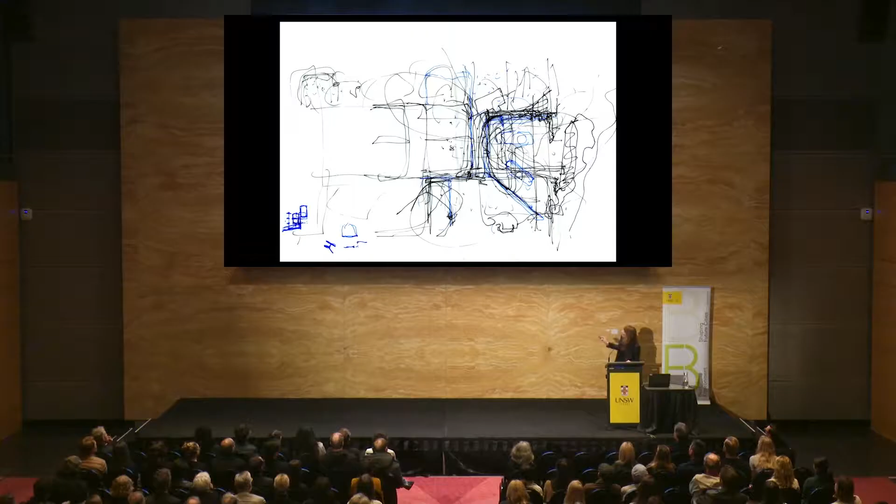The site has a beautiful rock on the street. It has bush to one side, and it stretches out to water. These are the aspects of the Griffin site, I guess, the Griffin past. And this drawing that Nick and I did, our hands one laid over the other, responds to Griffin's site with a room to the rock, a room to the bush, and a room to the view.

That really set up this pinwheel plan. You can see it's almost a direct translation from that sketch. You enter directly into around the rock, directly into the kitchen. This is the living room, and this is the cosy lounge.

What's important here is the material of Castle Crag, defined by rock, and Griffin's work with rock and concrete really become the material of the house. So in the kitchen it's almost like a cave where the rock comes into the house, as opposed to the living room, which is about precipice and looking out to the water.

The cosy lounge has a fireplace, here. We all know that if you get more than about 1.5 meters away from a traditional fireplace, you won't feel any warmth - that's why the lounge is so small. But this is one of the elements that we retained in situ. Here was the house as it was - we actually retained the fireplace in that wall.

We left the story of the marks that we had made on that house in the architecture. We mixed recycled brick from the house with new recycled brick that we sourced elsewhere as the materials of the project, the past being evident in the material of the house.

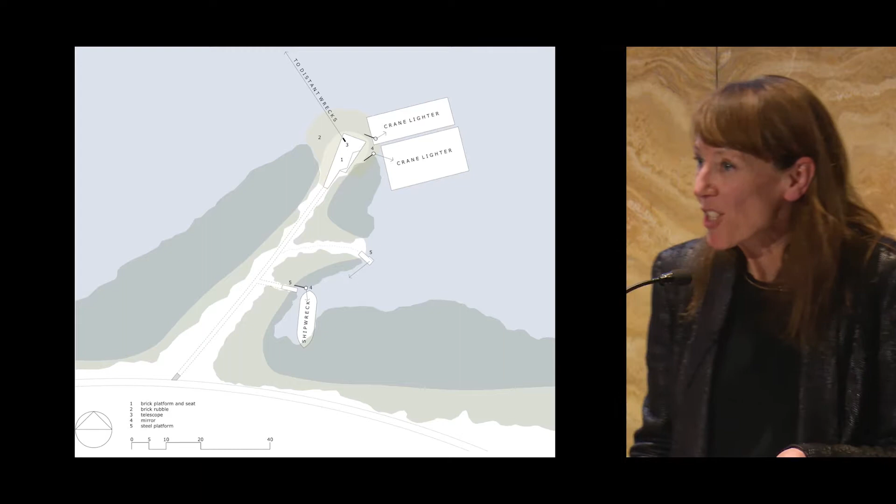Our brief was to provide a safe lookout that was accessible to all, that kept the public off the delicate saltbush, that protected mangroves, protected the headland, the little peninsula point, from the encroachment of mangroves, because that point is protected under treaties between China, Japan and Australia for migrating birds, and they won't roost there if the mangroves encroach. So there was a whole lot of interesting conflicts.

We were drawn to this project by Lucy Lippard's book, and through this project we really looked at the history of lookouts, which evolved in the Romantic period. Lookouts basically entice the visitor to look at a view that has been chosen for you.

We took this a step further by designing what we called looking devices, so that people would come to look at these shipwrecks or whatever, but they'd actually look at a reflection of it through a telescope or a mirror.

The mirror was also a way of enabling people to look into the adjacent crane lighters if they were in a wheelchair. That was our way around avoiding a 30-metre long ramp.

This is sort of the idea of those things. We use little metal platforms and material coming out of the past, the ships, to get up close to them. We made as narrow a pathway as we could to give the sense of discovering a shipwreck. So these look like they've almost fallen off a boat.

The little peninsula was man-made. It was created to cart bricks from the nearby brick pit, load them onto barges, and this is a pile of bricks we found when we first came to the site.

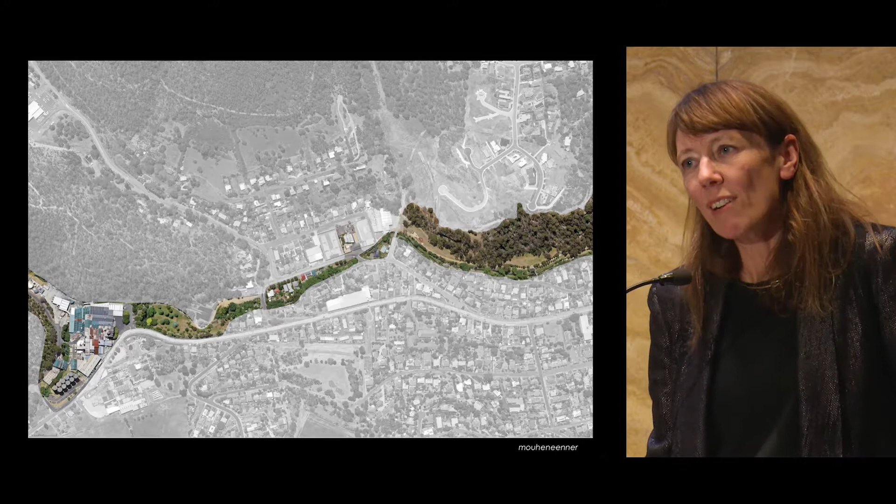Our approach to this quite harrowing history was one of inversion. This diagram shows it quite beautifully: this valley would become a public walk, and this space would actually be a public space, and then the museum, if you like, would be these 2 yards either side. So where there were compounds, there's open space. Where there was austerity, there would be sensual richness. Where there was division, there'd be joining together, and where there was controlled movement, there would be freedom of movement.

So here's that public space. You come in, this is the visitor centre at the rear, and the elements of the walkway, like the cloister, the female cloister, mark the height of the walls as they once were.

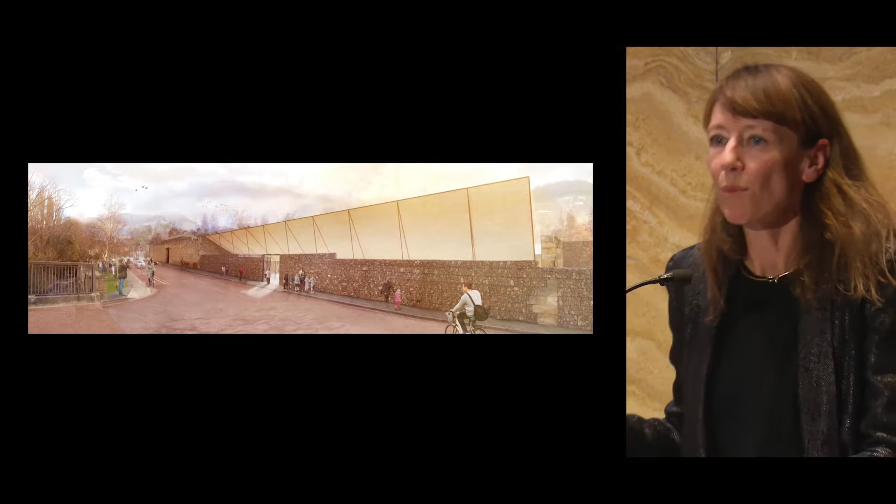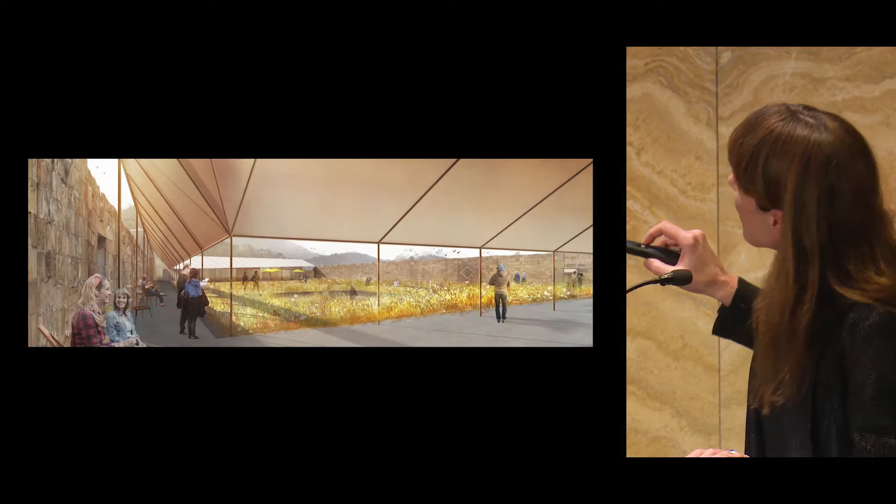These women would pick the tar off the ropes from the boats. They would also do all the laundry from the hospitals, and they'd make uniforms for soldiers. So cloth was what they did on a daily basis — work was to do with cloth, and they wore a yellow C on their uniforms for criminal class.

So we worked with Sue Barnsley and her team to evolve this luxuriant garden of yellow meadow and yellow flowers, and the building was essentially made of cloth, with rooms defined by cloth, tapping into the seasonal grassland calendar.

Settings is my second theme. We prefer to think of settings rather than sites because it implies breadth. So we think of geology and topography and that relationship then to hydrology and landscape and urban context and microclimate.

Philip Thalis introduced me to Norman Selfe, who wrote about Sydney in 1906.

The outline of the present city bears a rough resemblance to the back of a right hand severed at the wrist, Cleveland Street, its southern boundary, being the line of severance. Laying the palm on the table, the thumb represents Pyrmont, the long space, Darling Harbour, the forefinger, the York Street Ridge, ending with Millers Point and Dawes Point, the middle finger, the Macquarie Street Ridge, ending at Fort Macquarie, now Sydney Opera House, the third finger, the Domain, ending at Mrs Macquarie's chair, and the fourth finger, the Darlinghurst Ridge, ending at Potts Point, with Rushcutters Bay as the eastern boundary.

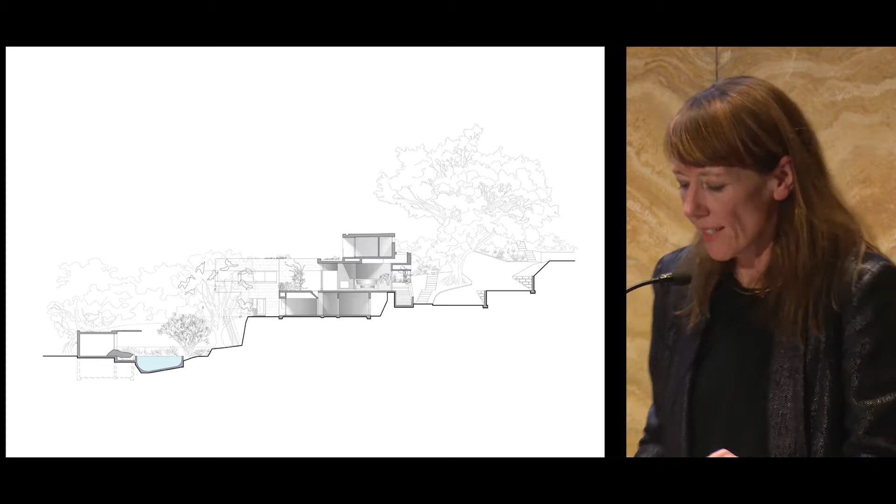This is the little cliff that runs through the site itself. So that cliff organises the site into an upper part and a lower part. And the upper part is here, that's where the main house is, it sort of hugs the corner of the site. And in the lower part, like in a sort of natural setting, the lower part holds a water hole, a pool.

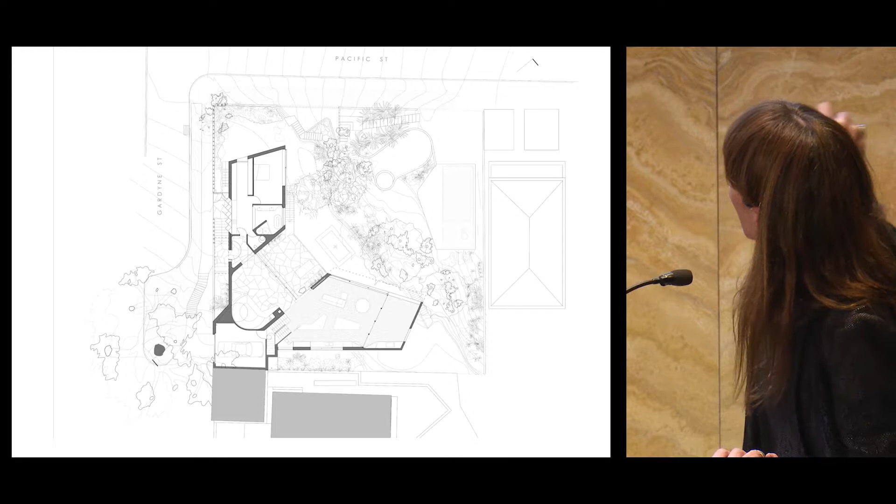So the square site, the house tucked into the corner, and this is the most important room of the house, really. It looks diagonally across the garden to the distant ocean because the diagonal is the greatest extent of view. This is the biggest house we've ever had a brief for, and our response to the brief for a big house was to give them a big garden. So it's a strategy for a big garden.

So that's looking from inside that space, where again we've used sandstone, and it's thick stone. It's not a thin laminate, it's a thick stone on the floor to bring the sense of the garden right into the house, and literally the garden into the house through planters.

And then the house itself extends out into the landscape, so it's cantilevered at either ends, and all the pathways in the house become pathways in the landscape. They sort of become blended, if you like, with the contours of the garden. Framing views and using the house also to edit views of neighbours.

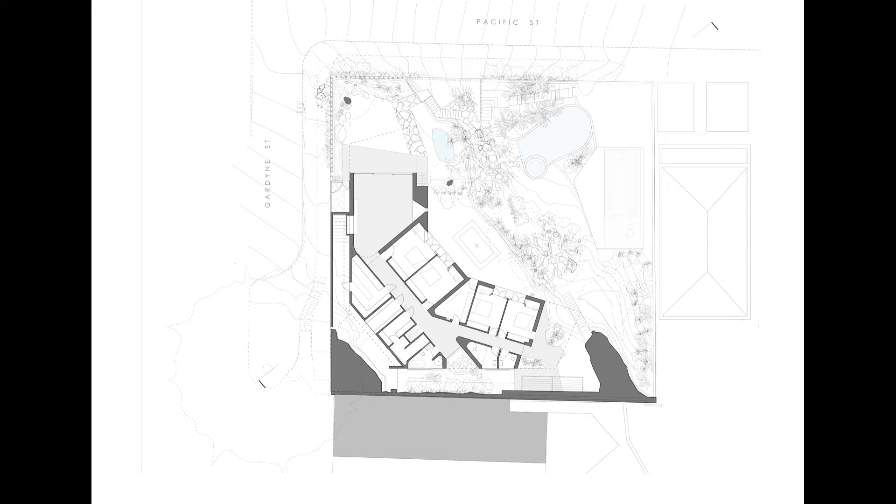As you move up through the house, the materials get darker, and as you move down, the materials get lighter. And then at the lower level, where we've got lots of bedrooms - there's 4 boys in this house - you can see how the corridors, hallways always end in garden. And then they become pathways that take you through the garden, down the stairs to this lower part of the garden, up the stairs. There's circuits that run through the house and garden together.

That's looking at that lower corridor out to that rear garden, the side garden. That's on the south side of a 2-storey building. It's kind of remarkably verdant.

And the cantilever out on the northern edge. So we retained lots of trees, and then we imported lots more trees into the site, and we retained existing cliff and boulders and relocated cliff and boulders. And this is then looking down into that lower garden, which holds the pool like a waterhole, and this cabana space really gives life to this pool. You can see the floor material continues in, and even the landscape continues in. So it's a real sort of melding of the landscape setting and the house.

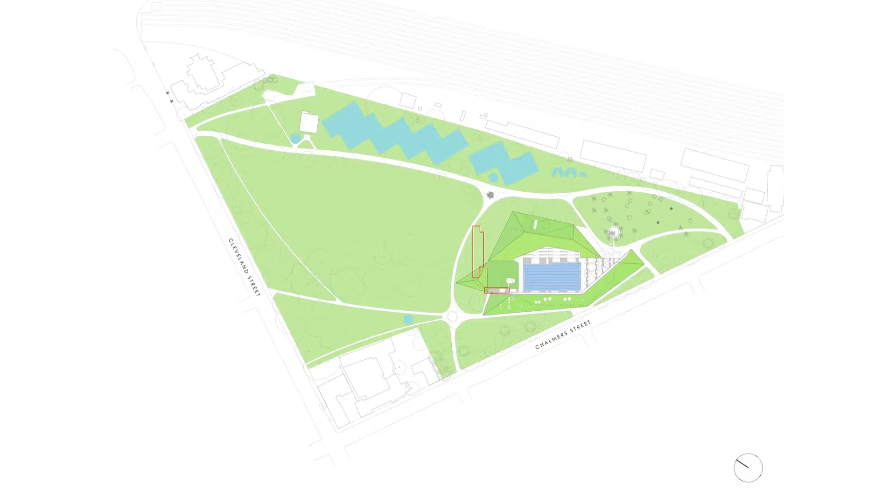Another very important thing was that we packed activities along the edge of the railway line, along this shareway, to give it a sort of vibrancy, including fitness nodes around the park. So we really tried to bring activity to the park, recalling the activity of the past. We worked with Sue Barnsley on this project, I should add.

So you can see here the folded landscape over the building and the scale of the park. The architecture responds to the scale of the setting, but also responds to the intimacy of the act of swimming and changing and swimming.

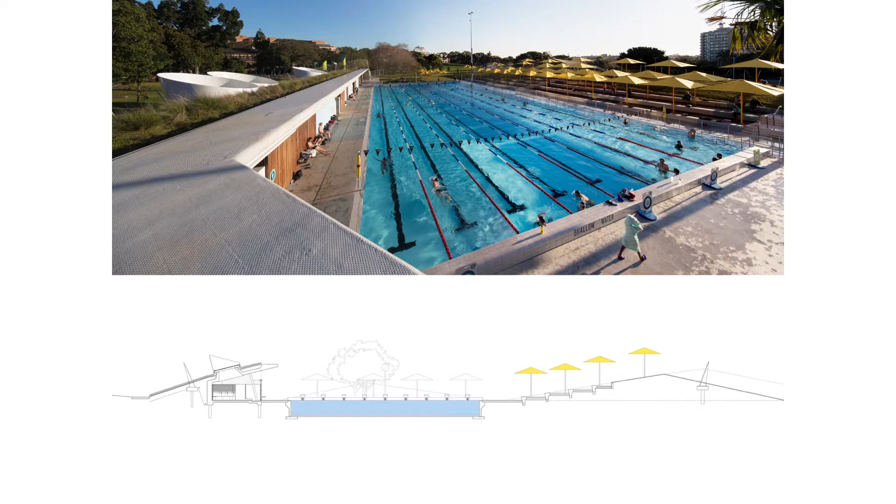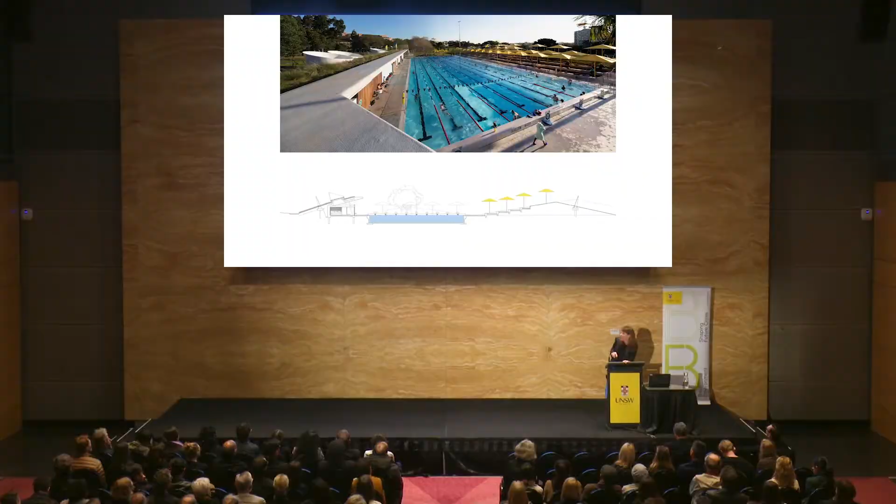We used mounds to contain the contaminated spoil. The presence not only of the pool but also the ice skating rink, which is an external rink, left a lot of toxicity in the soil. So we used the mounds as a way of dealing with that on site, and also as a way of separating, connecting park and pool, and dealing also with the microclimate, so just taking the edge off some of the winds in the park, so you could sit out of the wind.

And it forms this kind of beautiful space and this beautiful acoustic space. So when you stand up here, you can hear the splashing of lap swimmers. You can't actually hear the buses on Cleveland Street and Chalmers Street.

It's a long line in the landscape when it folds down at either end. And the material of the tile reflects the water in the pool.

At the same time as being a building that's essentially underground, we worked very hard to deny this. So I think this photograph shows it quite well. We worked very hard to make this feel like it was sort of floating.

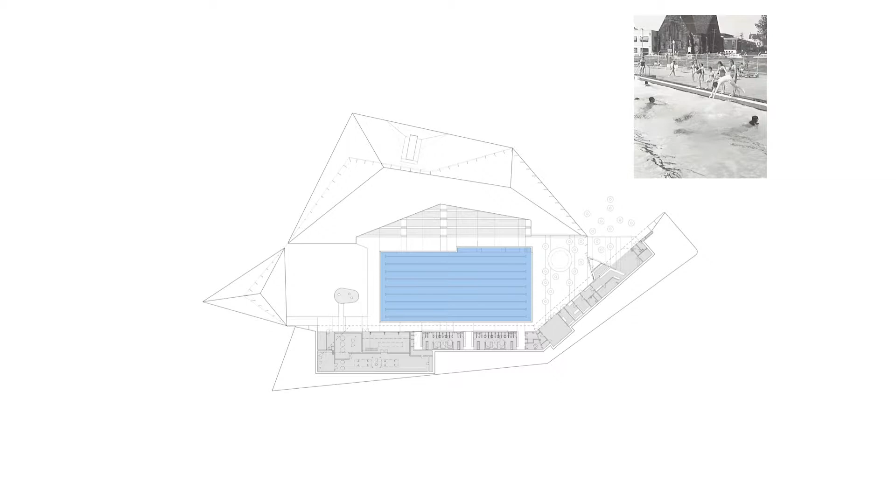And these are the change rooms here. This is essentially the services plant room, which includes capacity for future trigen, and the cafe, and then administration up the end near the toddler splash deck.

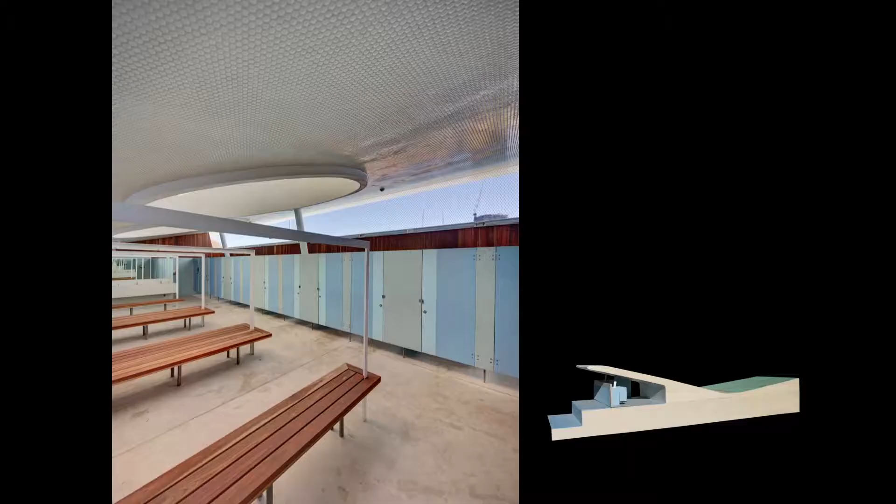So the big light funnels were a way of dealing with the fact that you're underground. Also bringing a balance of light, so pulling in light from the east, and also providing privacy to the apartments behind. So dealing with the setting in a very direct way.

The section is very intimate. Here it's only 2 metres - we had to get a dispensation from our certifier for only being 2 metres. You can really see the tiles come around like this, and you can sort of touch the material of the tile on the back wall. And then the skylights are oversized, so there's this play between monumental and intimate in this project.

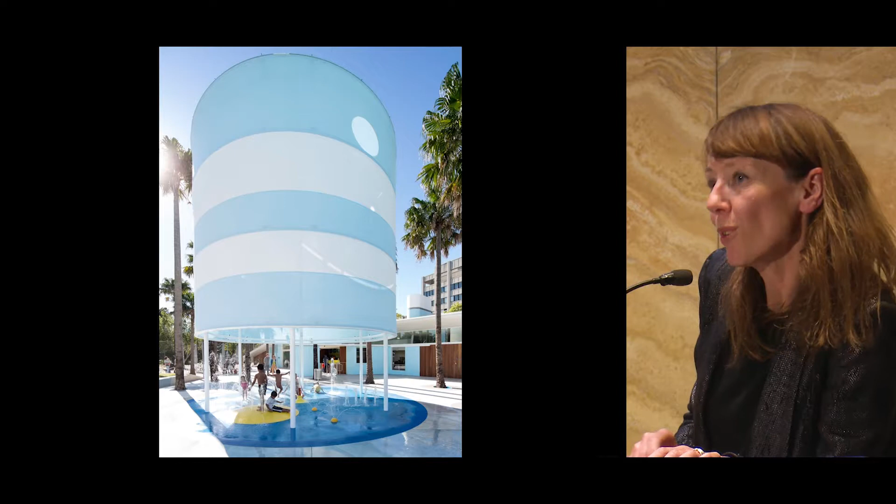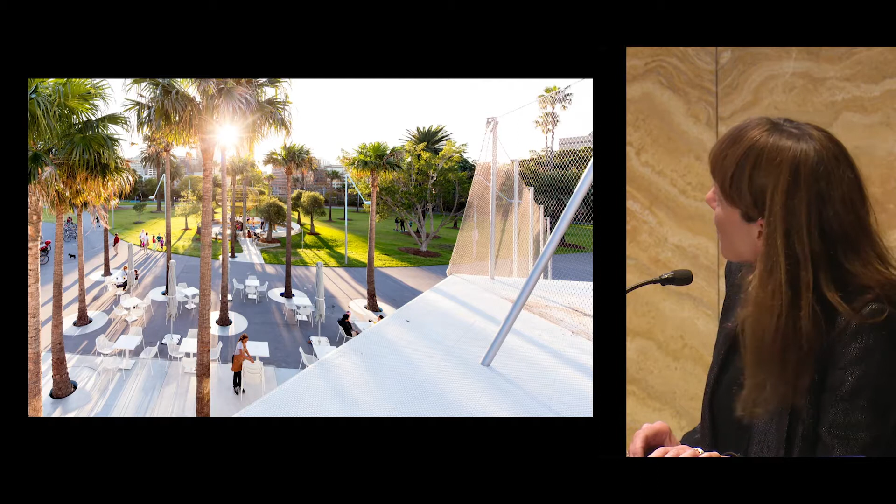The other elements needed in the park that were not to do with topography were treated as follies, I guess a bit like the Victorian folly in the park. You can see here the co-location of the little toddler playground with the cafe, and we used a grove of palm trees to bring shade to this area.

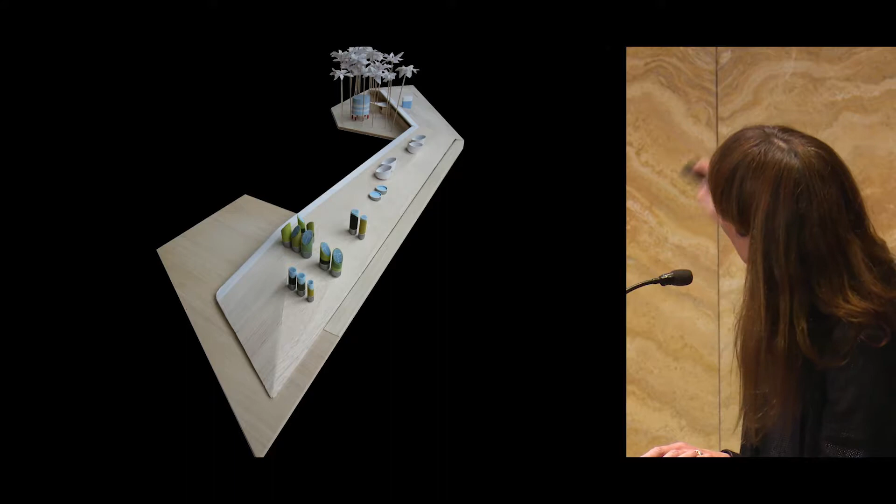Okay, the roof was quite a tricky component. So here we have the palm trees and the toddler splash deck at one end, and down this end, underneath here, is the plant room and the trigen. Pools are incredibly corrosive environments, as you know, even external pools, so there's a lot of fluing to do with the services and skylights.

So we collaborated with Sonde van der Haar on these chimneys. They're an artwork, called Shades of Green, because although you're burning gas to create your electricity, it's still non-renewable.

But the most important material of the project is, of course, the meadow. And Sue Barnsley did an incredible job selecting a variety of different native species that would flower throughout the year.

Connected to the idea of a pool in a park, of course, is how to fence it. This beautiful running fence project by Christo inspired an approach to the fence, where if we had a mesh fence that could duck and dive over our roof and in and around the meadow mounds, you would never see it in its entirety. So you'd never feel like you're being kept out of something or enclosed within something - you'd only ever see part of a fence. And sometimes the fence is quite invisible, and other times it's more visible.

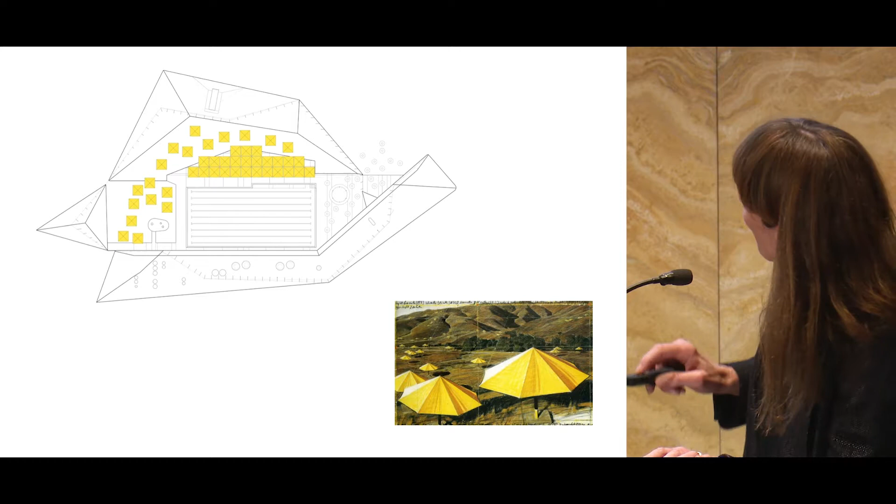And the other component to do with setting is the shade. If you want to have school carnivals at a pool, you need complete shade over your bleachers. So we introduced the idea of umbrellas. The thought here was that some people will put up the umbrellas and other people will leave it down, trying to cater to the sunbathers as well as the people who live under a hat like I do. But it really creates a dynamism within the park. Whenever you walk past or drive past, you might see all the umbrellas up or only a few up, so it gives it a real sort of living vibrancy through the material of the architecture.

And that's that major park pathway, as we finished it.

We embrace limits as a creative opportunity. And I love this project, this little pavilion by Decoupled Architects, because it seems almost that architecture is limitless in this project. So limits might be a boundary, they might be a set of regulations, they might be an actual physical condition, but they're productive to our design process and often generative of our design solutions.

This is a house at Whale Beach that Nick and I designed some years back, and you can see from this little topographic diagram that it is very steep. It has beautiful views to Careel Head, but it has a huge escarpment right behind it, so it's really challenged for sun. So steepness was the first limit, and this was a little exploration in how do you make 60-odd stairs feel manageable to your front door. So this was really exploring architectural promenade and connecting that to how we would manage landscape.

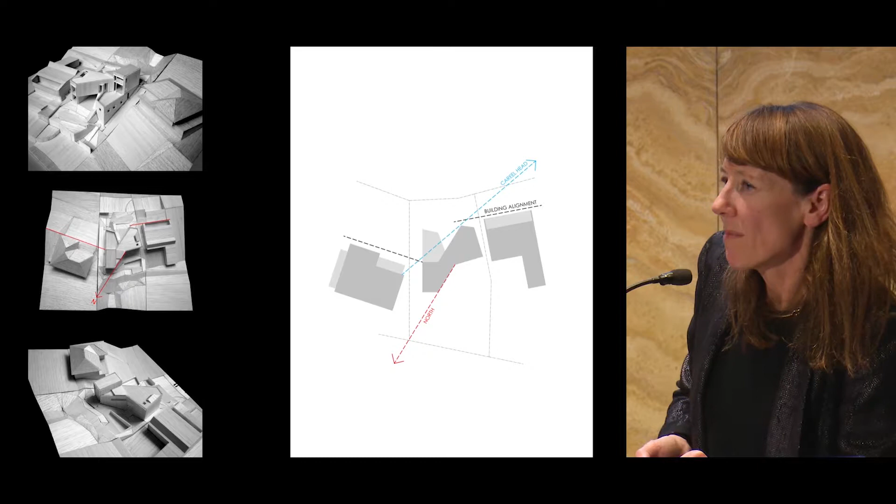And then secondly, the planning regulations were quite challenging. So the setbacks, trying to catch any piece of north sun that we possibly could, and also maintaining our neighbours' views. So I think it's a project that might look from the outside like it's sort of a sculpted thing, but actually it's all sort of almost mapped.

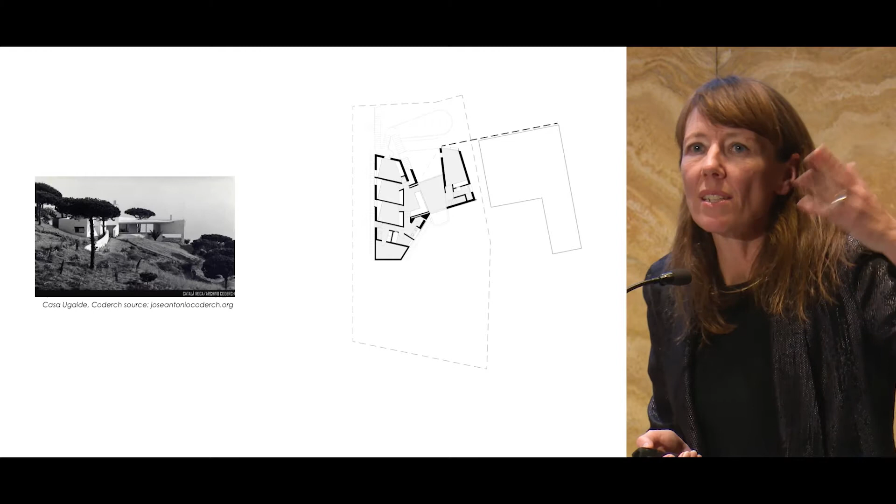So each level is completely different to the level above, depending on the planning regulations at that level. This is the ground floor. It was a 300 square metre house brief on a steep site, which can be quite imposing, so we were looking for devices to dematerialise the mass of the house, trying to make it feel like it doesn't overwhelm its site.

This is a Coderch house, Casa Ugalde, just north of Barcelona, and there's an opening through the house here. This is the opening cut through the middle of our house. It takes little cues from this project.

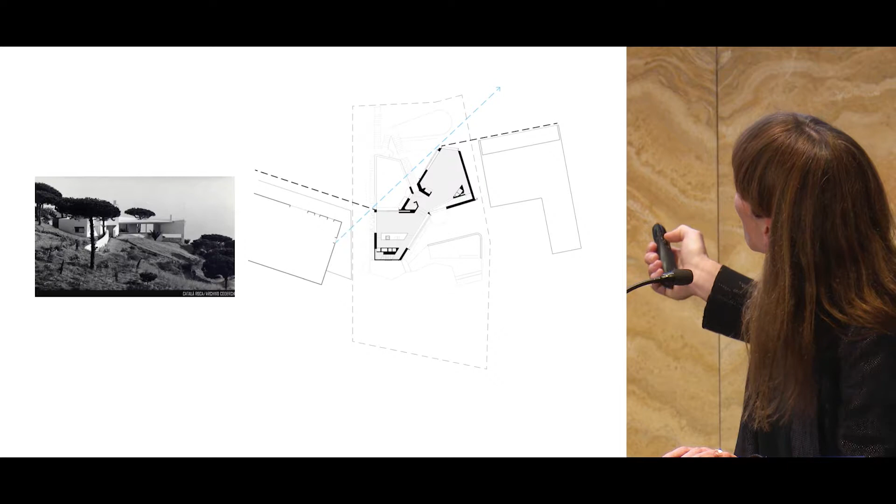When you come up those stairs, you come into an incredibly thin part of the plan. On one side is the living room, and this is the dining room. The architectural promenade, in a sense, continues into the house through stepped levels, which also help with views.

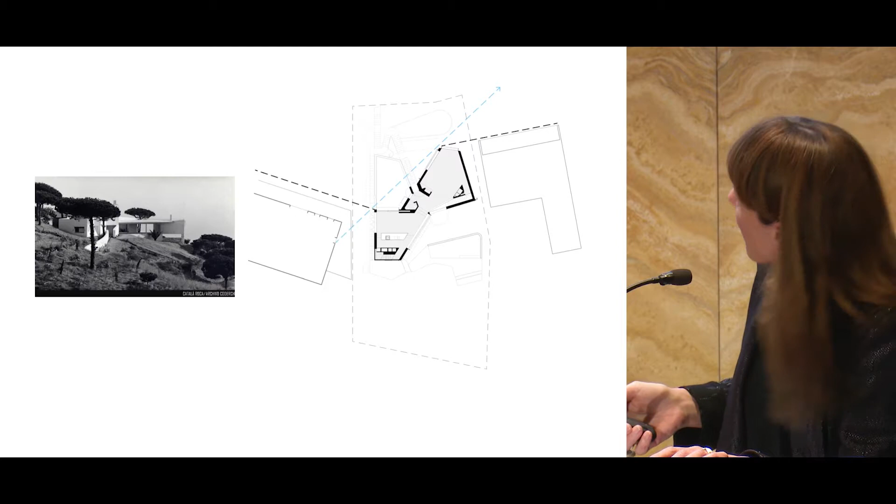And then the top floor, trying to deal with that two-storey height limit. So the third storey actually isn't a third storey, it's really a second storey, but it's incredibly constrained in this little corner of the site.

So that leads to this sort of winding sense through the house. This is the main level, as you wind, almost as if you're walking along a contour on that steep precipice.

It speaks to the proximate view, the view you can open the back door and step into, which is also very beautiful. Then set against that is the horizon and the headland, the majestic view. So it works with proximity and distance, and it's shaped by its kind of planning limits.

We also use different materials to help dematerialise the mass of the house. The upper level is clad in timber, and being a bushfire 3 zone, as it was called at the time, this is spotted gum, a fire-resistant timber, which we also used to derive the interior architecture. So this is the upper floor, all timber, like a little timber room with timber fire shutters, and it's very tiny and intimate, almost like being on a boat.

This is, we're back in Bronte, I think you might have seen that image before. This is actually the house that Stephen and I made for ourselves. It's just across the road from the park that leads down to the beach.

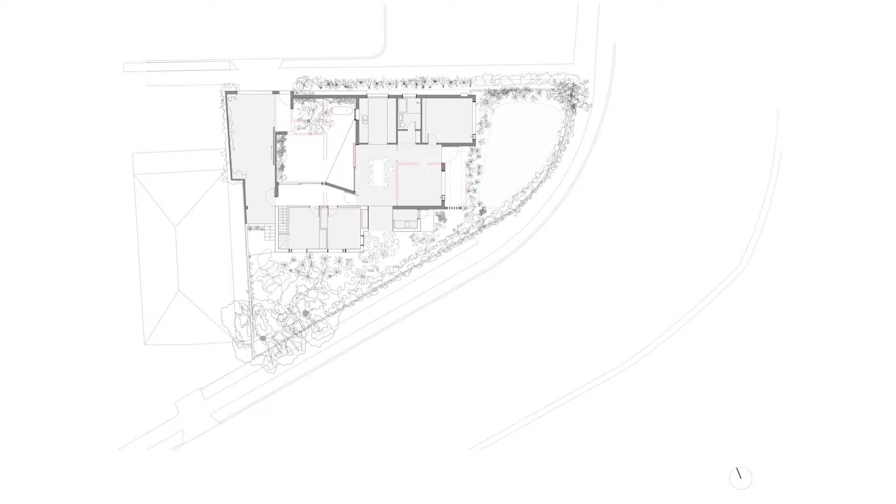I literally cut a hole in the house, and luckily the road's a little lower, so with a bit of planting you can mostly not see the traffic, and that somehow helps you not hear the traffic if you can't see it. And literally a hole in the house, a hole in the roof, sorry, and we craned in a tree.

So this is then looking east towards the garden and the ocean horizon, and then looking north towards the street. We stepped this level up so that you can retain a window and have some communication with the street, because the floor level is basically the same as the footpath. That all works fine until someone unexpectedly very tall walks past and you get a bit of a shock.

And then this is the view back to the courtyard west, and down this is the old wall of the house, and these are the bedrooms. And then through this black reflective portal to the south, which is full of green and garden, it reflects at night.

Limits in a public building. This is a surf club, about 500 kilometres north of Sydney, at Crescent Head, just on the coast from Kempsey. A beautiful little fishing and surfing spot, an iconic surfing spot, as you can see from this postcard. Longboard point break, I'm told.

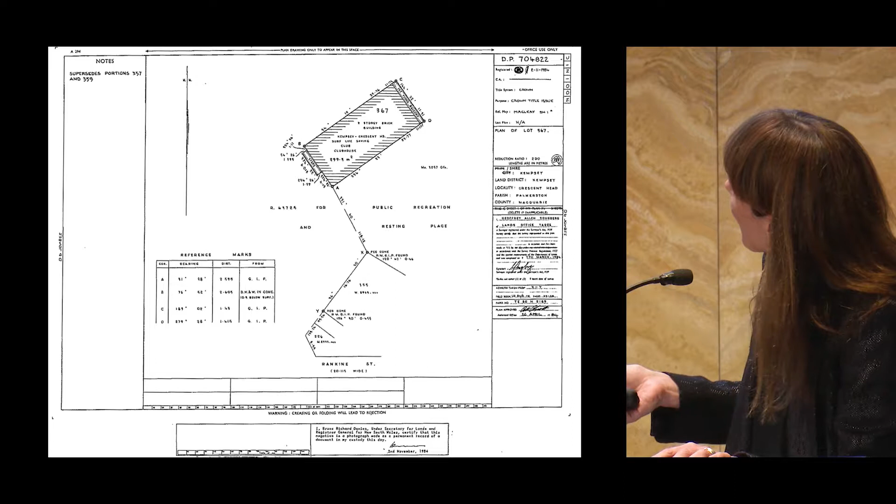This was the most important drawing—the legal document that defines the site. The club has a lease in perpetuity with Crown Lands for $200 a year. Basically our brief was, if you so much as hang a gutter over that boundary, we lose our lease. So the challenge was to somehow relate this given plot to this magnificent site.

Luckily, if we built the full 2 stories, we'd be over the 500 square metre limit, which then triggered the need for a fire booster pump, which was about $250,000. So we used that limit in order to deal with the other limit—by carving space out, that meant we could feel like we were addressing the site.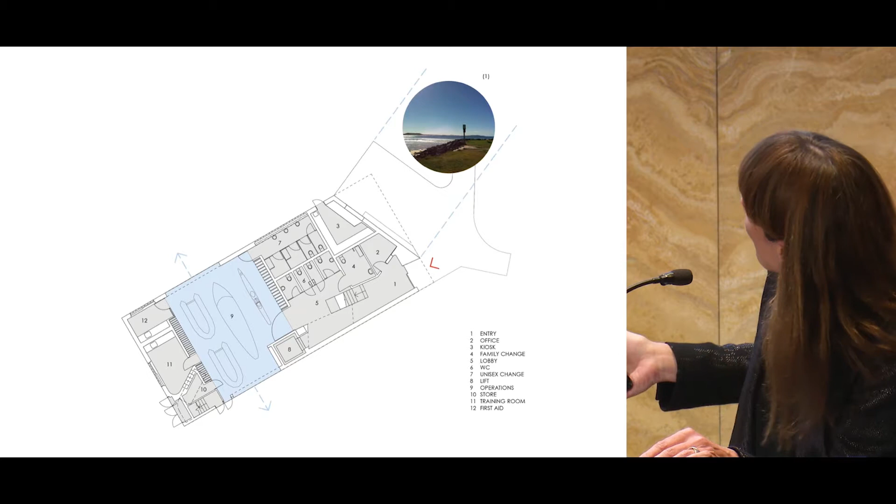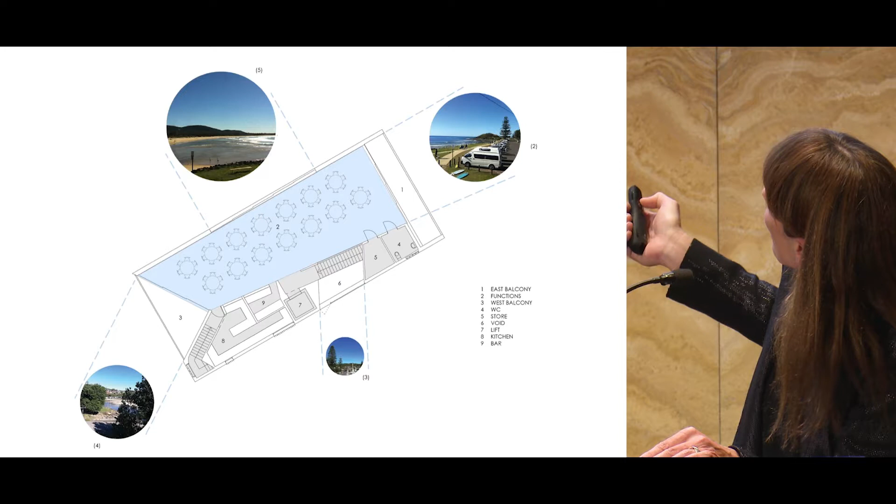So the kiosk, the lower level, faces Hat Head. The function room up the top, the entry, looks back to the town. That one end looks to the horizon, the other one along the beach, and then the little balcony faces you back to the creek. That's the kind of sense of it.

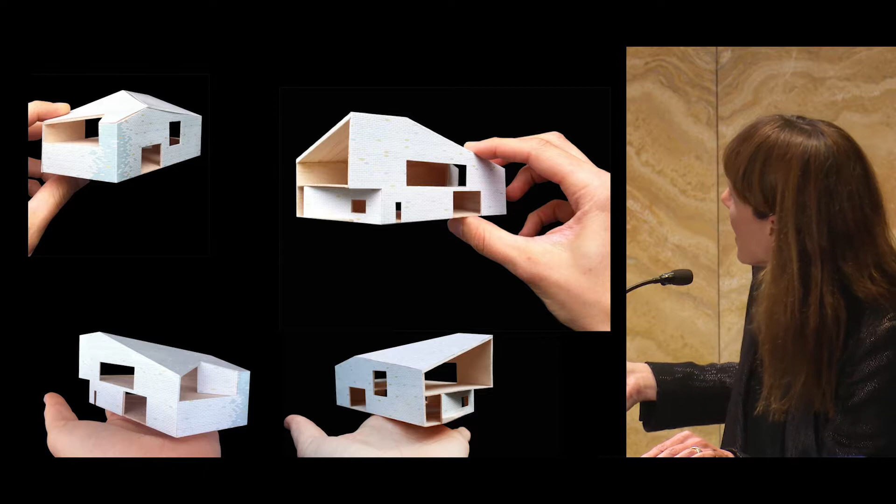It was important—this is a comment Stephen made—that this building somehow feels like it belongs there. It had to have a sort of beachy quality, whatever that meant. The way we interpreted that was that it needed to feel like a building wrapped in and around, so we were looking for a material we could clad not only the walls but also the roof with.

It's also not a particularly wealthy demographic, and we were lucky to get federal funding of $2.4 million, supplemented by sausage sizzles—so not a lot extra.

You might see at the kiosk end, that's actually the boundary. And if you look at that seat, you'll see it's actually just cut off on the boundary with a little bit of tolerance—I think we gave ourselves 70 mil tolerance for that. So the planning, the legislative definition of the site, actually kind of formed the building.

The second thing was, only 40 metres from breaking surf, we had to have materials that would be robust. With $2.4 million, we couldn't afford to do a concrete structure with tile all over it, because it would be so heavy we'd end up spending half our money in the ground.

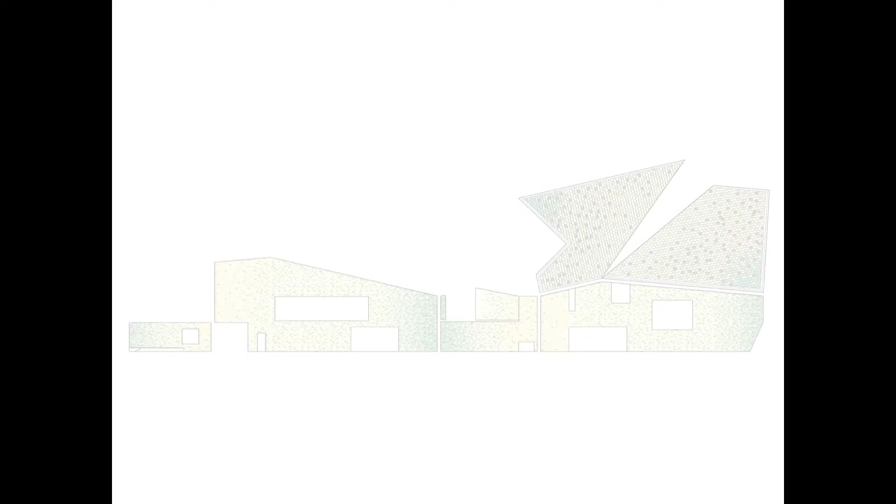The patternation—we used the colours to accentuate different corners to really try to speak to that idea of orientation of the legal lot, I guess, in the context of the site.

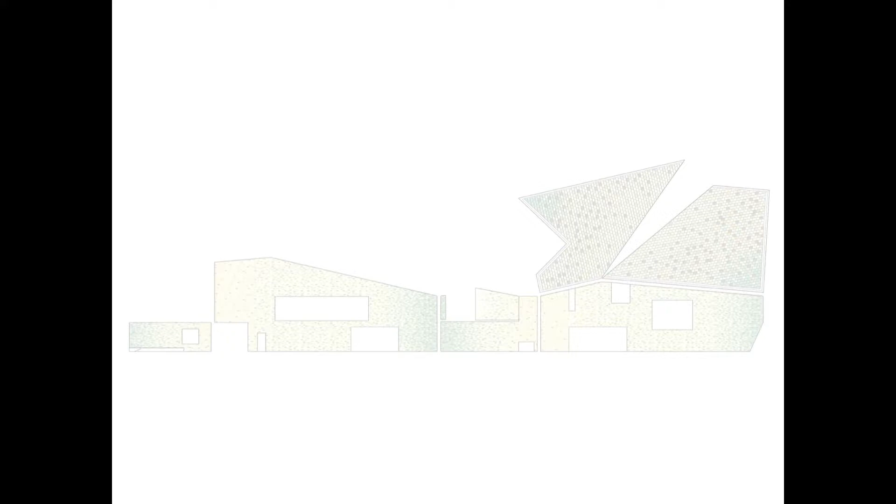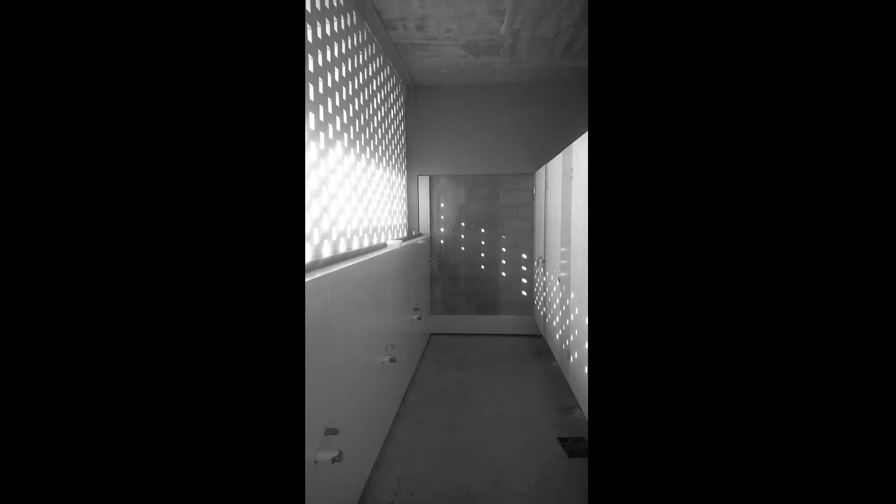So the 5 major openings direct to the 5 aspects we identified as being important to the site, and wherever else we needed windows, the bricks just became a brick screen. That's into one of the change room areas.

What prevails is about architectural judgment. It's how you edit—what you choose to retain, to remove, to alter, or to add to. It's what you choose to presence.

This is a fantastic project by French architects Lacaton and Vassal—I heard Anne Lacaton speak about this when I was in Barcelona. It's an urban square beautification project in Bordeaux, one of a suite of squares the local council had earmarked for beautification. They went to the site, had a look, and came back to council saying, 'You just need some new gravel and a bit of pruning.'

Their design was to do no more than that—the space already was beautiful and had an authenticity to it, which was a key part of it. So it's being brave enough to resist the commission, I suppose.

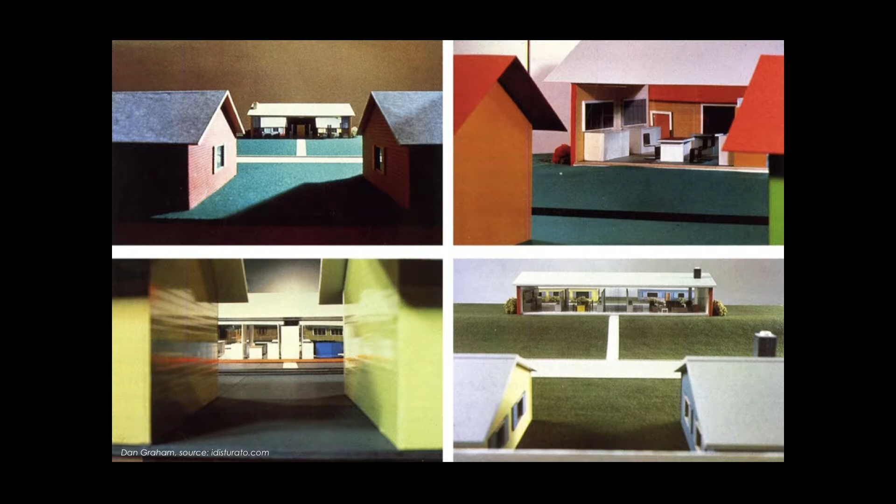So the project tries to connect the house better with the garden. The brief from my dad was no mowing—he was over it. And my mum just loved the solidity of the double brick. Taking no mowing and the brick on as key parts of the brief, this project for my parents retains and extends the brick and tile.

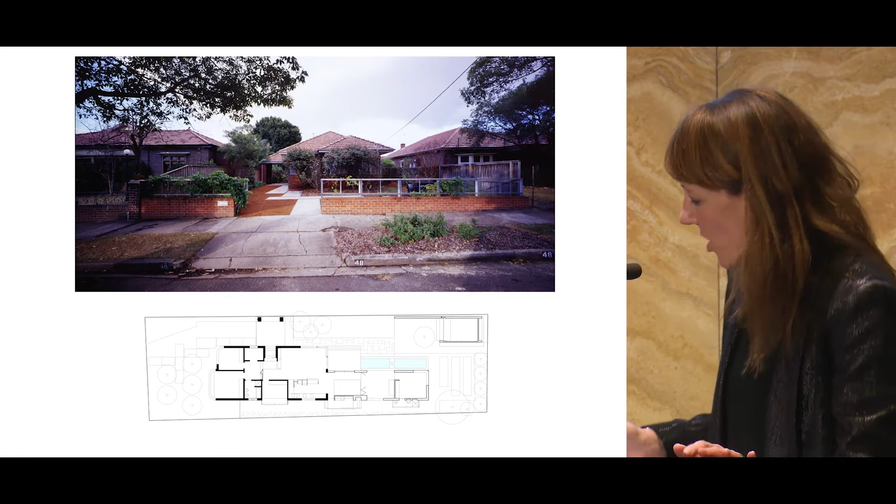This is the existing house. We demolished a little garage that was there, cleaned all the bricks by hand, and extended the brick pavilion onto the house. We reused the tiles as well, so it's essentially an extension.

Then we introduced a couple of three little timber elements that hover on the back. But more importantly, a connective ceiling—a sense of a new ceiling with light funnels and air funnels. It's almost like a new sense of space moving into this old kind of shell.

So the interior is made of whiteness—it's render, basically. Just finishes where you can see the thickness of it.

These are the hovering elements on the back. We relocated steel windows and added new windows and doors that were also steel, making multiple connections through the thickness of the plan to garden.

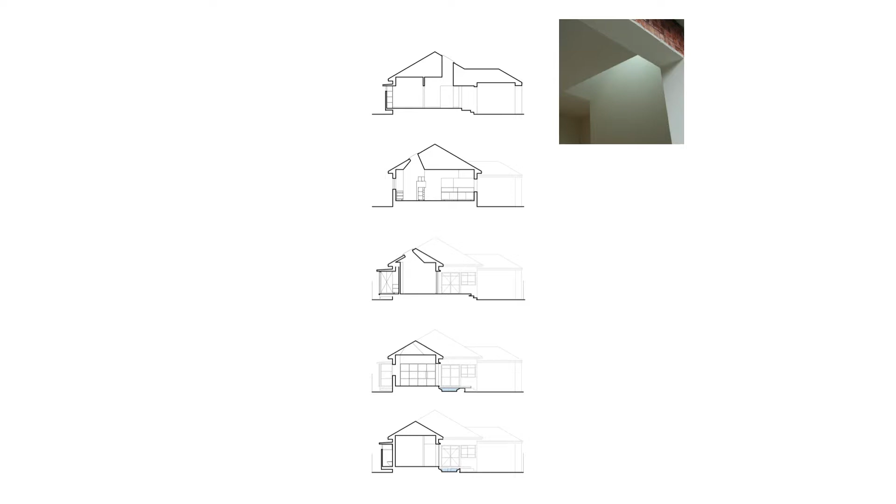These are little diagram sections showing the ceiling and how it punches light and air funnels through the house. Then we added a third element—oversized joinery units, which were sort of space-making elements.

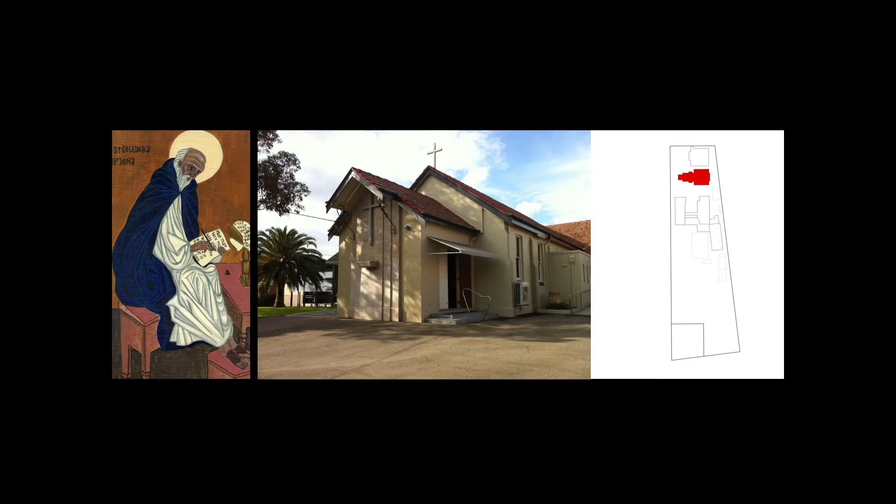Staying in the inner west and moving to a public scale, this is a Catholic primary school in Leichhardt—this is Iron Cove here. It's St Columba's primary school. St Columba is the patron saint of books and libraries, which is quite nice when you're doing a school.

You see this very sweet little church with a pitched roof—there it is in the site plan. The parish priest, together with the principal, were the clients for the project, and the priest was very keen to presence the church in the upgrade of the school in some way. So architecturally, we let the church lead the way.

That's as it was—you can see the original school building here, and this is a BER hall. So we undid the later works and returned the Victorian curtilage to the church. Then we used that idea of the curtilage to create courtyards—that's like the shadow of the end parapet wall of the old school, creating a little courtyard.

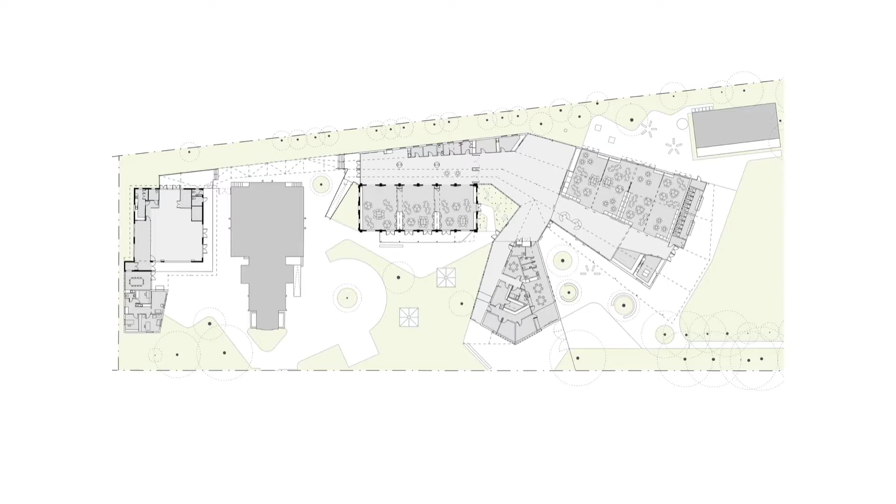This little entry courtyard is like the kindy infants courtyard, and here's a courtyard to the parish hall. You can see that diagram quite clearly in that image.

Importantly, this was the ceiling of the church with its pitched roof, and we used that idea of the pitched roof to create a ceiling-scape inside the school. So we retained the existing school building and sleeved in this new piece here.

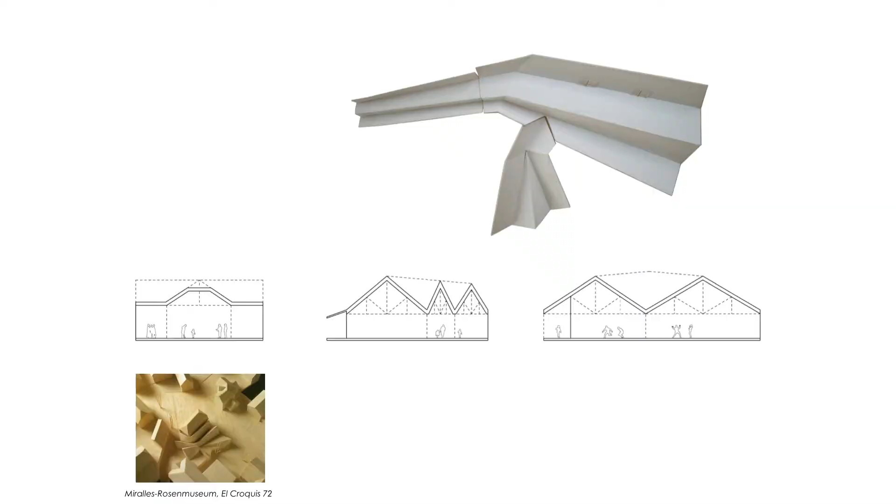The idea is that the ridge height matches the existing school, and this is the kindy and year 1, year 2 classes. They have these tall, peaky spaces, and as you move through the school, the space gets bigger.

It's based on the idea that children have an incredible spatial memory, and maybe they'll remember this in their school when they're older—they'll feel the movement, the progression from kindergarten to grade 6. So it's not really a roofscape, it's more a ceiling-scape.

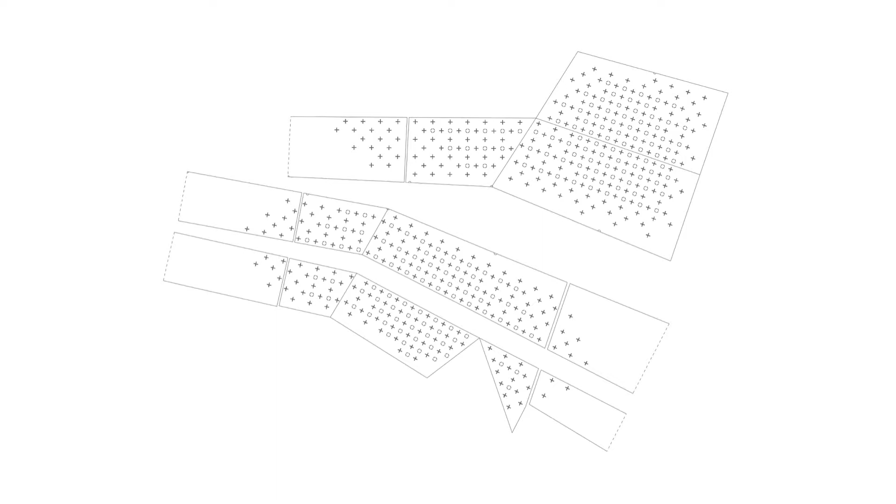Inside the church is this beautiful Wunderlich ceiling, and it has a pattern on it, which is the Iona cross. St Columba lived on an island with all these Iona crosses, and the Iona cross is the circle and the cross together. So we decoupled those, and we added pattern to the ceiling in the library space as a way of resonating back with the church. So the church really presenced not only in the form of the spaces, but in their treatment, if you like, or decoration.

So from a saint now to a master, namesake of this lecture, in fact. We won a little competition, an invited competition for a visitor interpretation centre at the Opera House, which was a little bit rather daunting kind of brief, really.

And for us, we interpreted that to be the sphere, that everything about the Opera House really emanates from the sphere, its structure, its form, its iconic nature.

So firstly, we found a blind spot from the public domain, a little place where maybe we wouldn't be so in the way. That was the timid part. And then we took a sphere and we imagined the concourse like a crust, and we pushed the sphere through this crust.

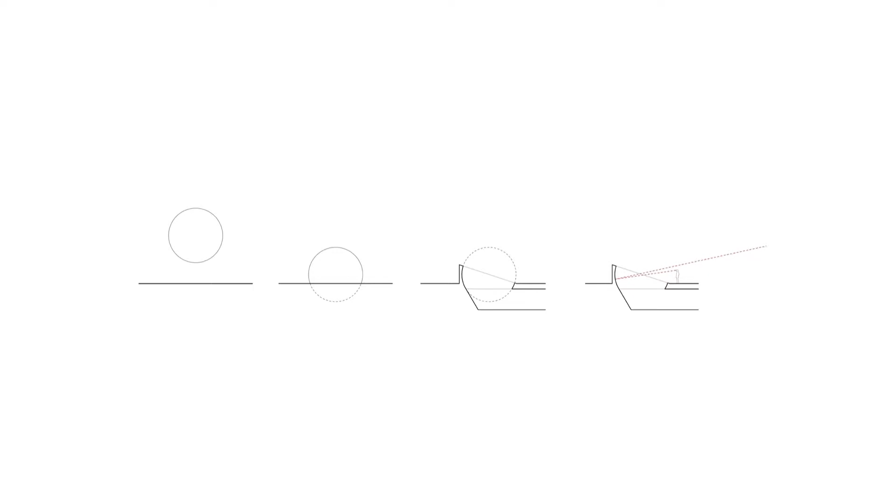And the sphere made an opening. And that opening, if we mirrored it, you could then stand in the concourse and look up and see a reflection of the Opera House itself. And then the space underneath that would be where all the sort of visitor interpretation, ticketing stuff would happen under the concourse, not more junk up in the forecourt.

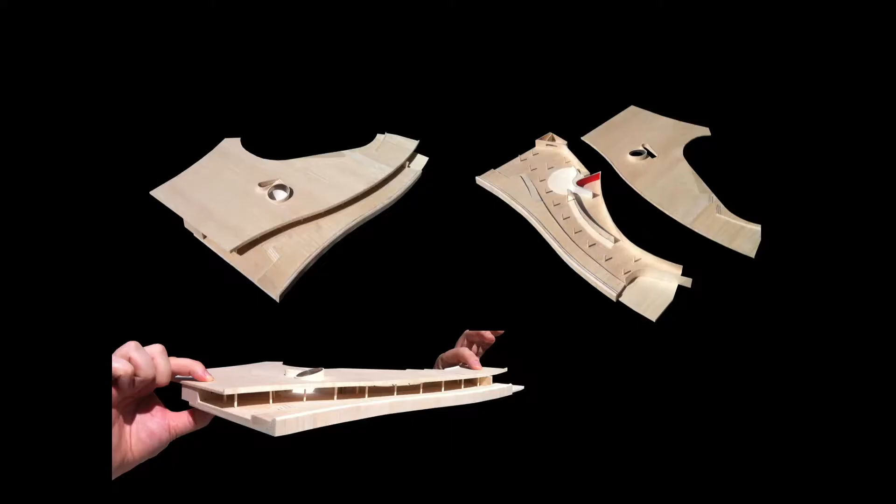So you can see here that's sort of what you would see in the forecourt, and then the rest of it evolves underneath.

And then we got so far as to even prototype the material. So the Opera House some years back in the upgrade of handrails stockpiled all these original handrails. So we tried melting a bit, recasting it, and we were really pleased with the sort of colour rendering that you would get through the sort of mirrored brass, US naval brass of these handrails.

Designing a house is an intimate experience. You delve into the narrative of people's lives. It also has a generic dimension. I mean, Stephen and I joke, if you tell us the size of the family, give us a suburb, we'll tell you what the brief is. But of course, you're looking to interpret the peculiarities and particularities of the family that you're working with.

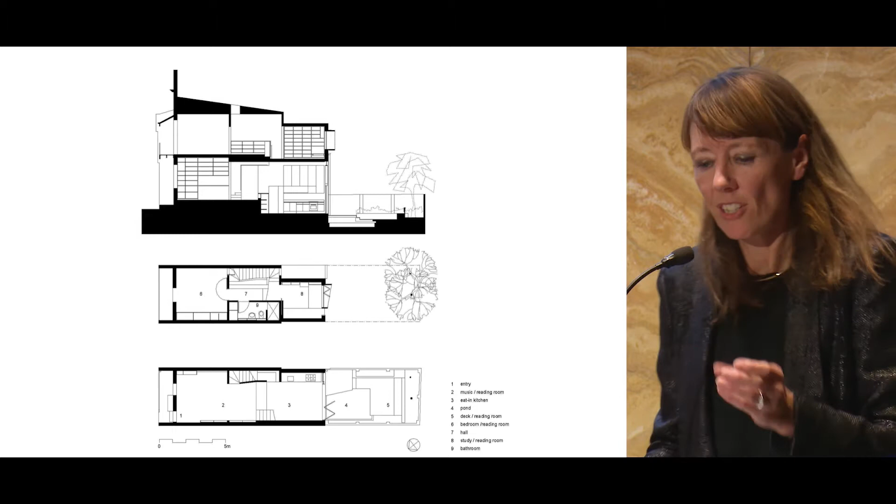The recycled karri floor gives that sense of this folding floor. The material of the walls is almost irrelevant.

We were keen that in the typology of a terrace house, you don't feel like you're being sucked up the stair, that the living space can settle, because the stair's there, but it's not kind of a feature of the room. So the stair is like a little slot in the side, and it allows Leslie in the bedroom to communicate with Noel down in the kitchen. And then the little sitting room, and then looking down into this sort of handkerchief kind of garden.

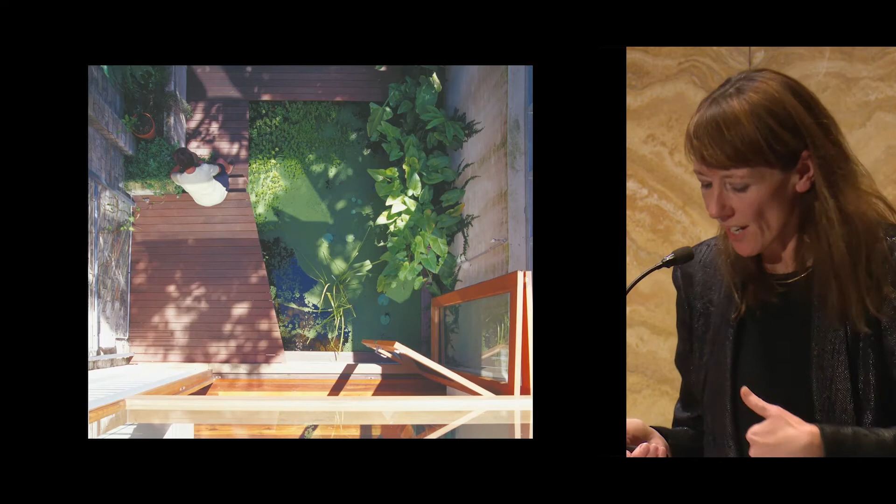The brief was, we want a house that's nothing like our city house. They wanted a house where they could house all their toys, a table tennis table and a kayak, amongst other things. They wanted a house where their friends could come and stay, but didn't want them to stay too long, so they wanted the guest bedrooms downstairs and really as small as we can make them, with theirs upstairs. They also wanted to welcome the extended family for Christmas, but not in the house.

So the particularities of these people and the spillage of functions into the garden made this quite an interesting commission. It's also, being so close to bush, affected by bushfire. And of course, they wanted a no-maintenance house, which we all know doesn't exist, but the metal cladding comes from the low maintenance and bushfire aspects.

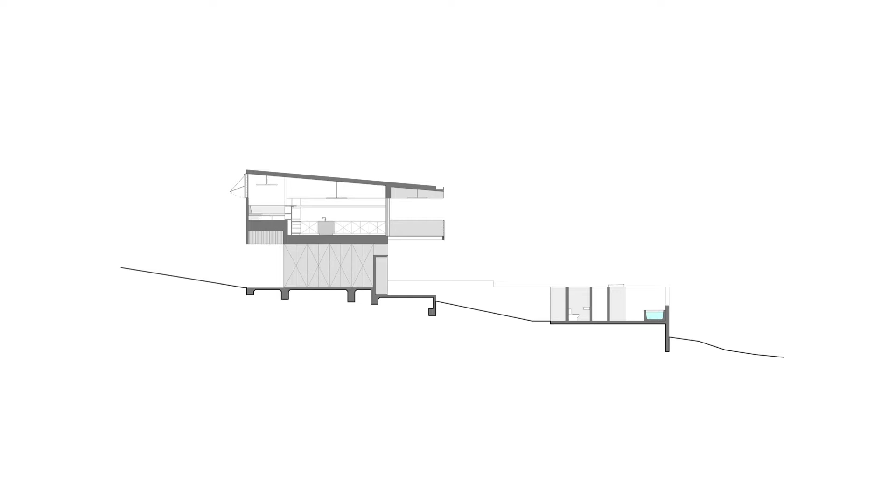We poured a slab next to it for the tent for the extended family. So literally there it is. When we took the roof off the old shed, it collapsed, so this is actually a reconstruction of the shed without its roof. I don't think Robert's ever used the indoor bathroom, he only ever uses the outdoor bathroom. The Bunnings tent in front of the house.

And then some of the qualities of light that you get with this metal, when you use the metal and the timber decking. Robert was also keen to whale watch.

So this is our roof access for cleaning, bushfire reasons, staircase, but the staircase is essentially outdoors. So to get from one level to the other, you go out of doors, and like in the terrace house I just showed, it's quite overscaled, almost the scale of a public surf club with thick timbers. So when they arrive, they can open up. That's obviously where Robert stores his kayak.

And we used canvas as a material of the architecture. It was really fun working with the canvas. The man who did all the stitching drove his van, and in the back of his van there was a sewing machine, and he stitched away making balustrades, and was great. But I guess that canvas connects to their love of camping and camp chairs and kayaks and boat covers and those kinds of things.

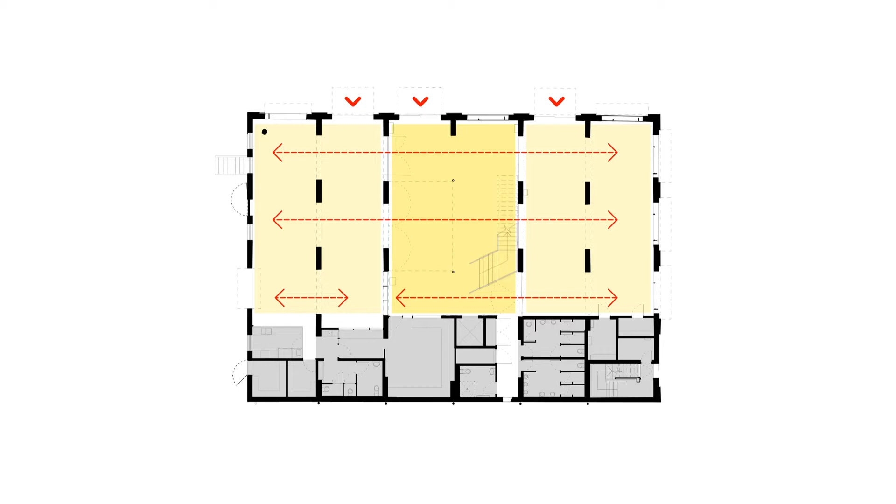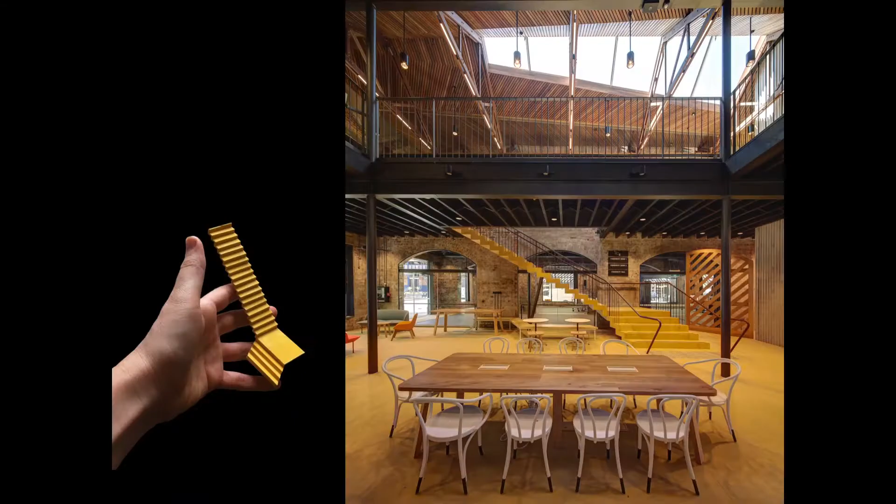We added a new roof, and we lifted up the roof over the atrium to bring in some light. The stair almost magically folds up like a magic carpet, trying to bring a little bit of delight for these people. It also does recall Juanita and her zigzag t-shirt.

Then where we could, on one side only, budget permitting, we strapped the handrail in leather, just giving that sense of warmth - trying to become intimate or personal with the users who we didn't actually really know.

Full of life - one of the tenants was Firestone Tyres. They were there for quite a long time, so we pulled their red Firestone tyre colour into the community kitchen. There's lots of little narratives, personal narratives really, that run through this project.

There's a ceiling that envelops the whole of the upper floor, an acoustic ceiling which works with the zigzag. We really went to town with that.

So my final theme is sunlighting. Solar orientation is elemental. We all try to optimise passive performance in our buildings to minimise reliance on energy. Solar access is so fundamental that it's a touchstone of our planning legislation. And we think of it in these terms, but also more broadly in terms of natural light and its impact on the interior.

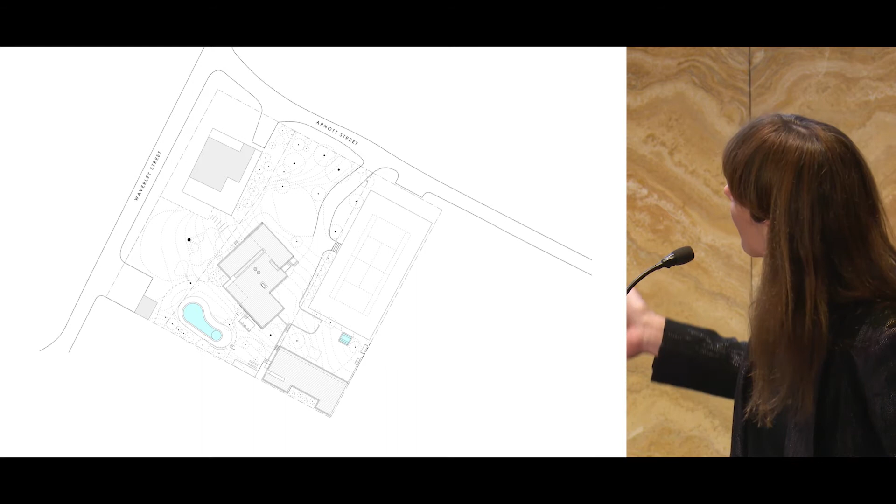When we came to do this project, the landscape had already been designed and built by a wonderful landscape architect, Fiona Brockhoff. The clients own all of this, and there's a little old house that one of their sons uses - we built this one previously, and then this is a house for them. It's oriented to this beautiful garden that Fiona had designed.

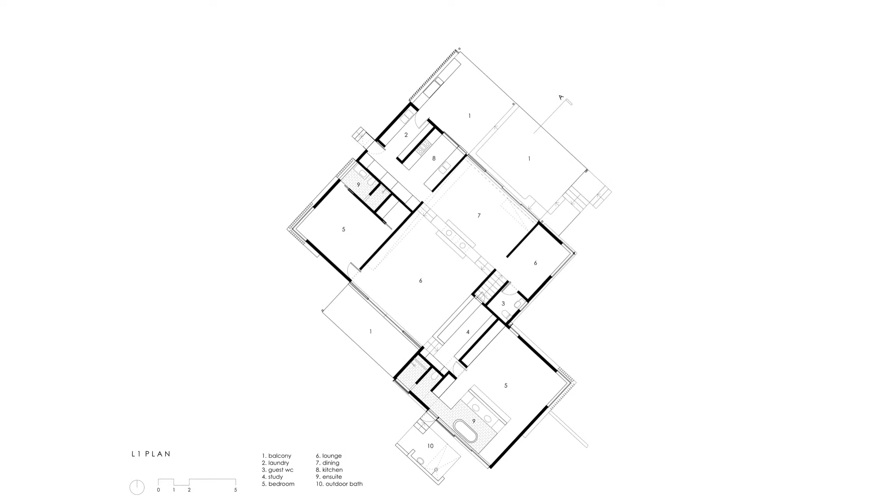It has a big room that runs through the middle, connecting the garden almost right through it. It's a sort of tripartite plan with views to the garden through the depth of the plan. This is coming in through the entry, looking right through the middle of the house.

So the project works to correct its orientation for sunlighting, using two devices. This is looking back out to the landscape from the front terrace balcony. It uses skylights to pull light into the interior and balance it. This is a long skylight facing northeast along here, and there's another going in the opposite direction.

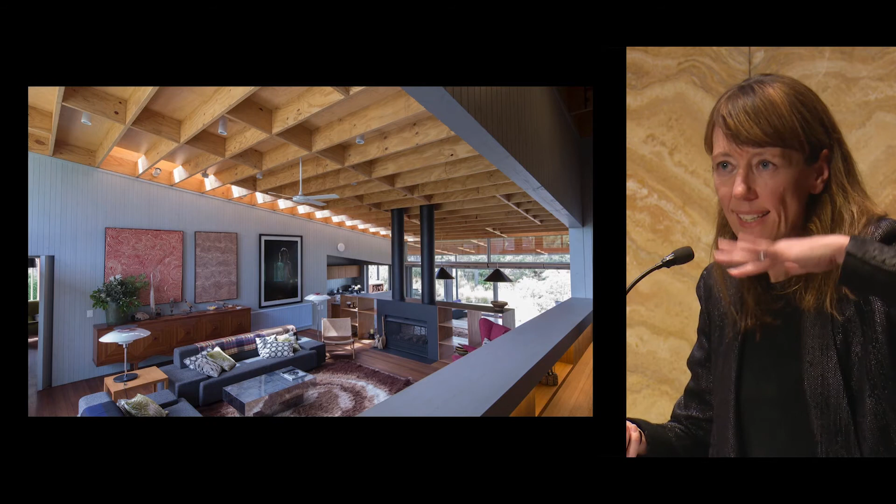In this LVL plane ceiling, we needed some struts to stop everything from twisting. They didn't need to be as deep as this, but by making them the same depth, we could create a crate-like ceiling, enabling skylights to be put wherever needed without interrupting the sense of space connecting survey and prospect.

You can see how that works, even popping light down into the middle of the plan where it might otherwise feel dark. The second thing was correcting the orientation for some of the windows - this is a northwest facing facade.

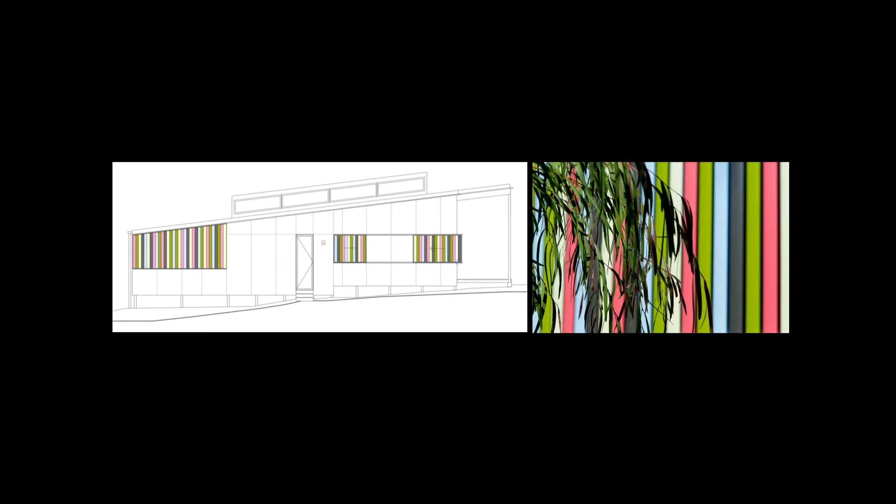The client was keen to cut out the heat from the summer sun, so these are adjustable coloured louvers. The louvers pick up on the patterns of colours in the landscape, and quite beautifully they reflect one another - even though we only had 5 colours, they reflect about 11 colours. They sit quite beautifully in the landscape.

And they create a moody interior. This is from one of the bedrooms where the garden rises up and fills the space of the window - you can't see any sky.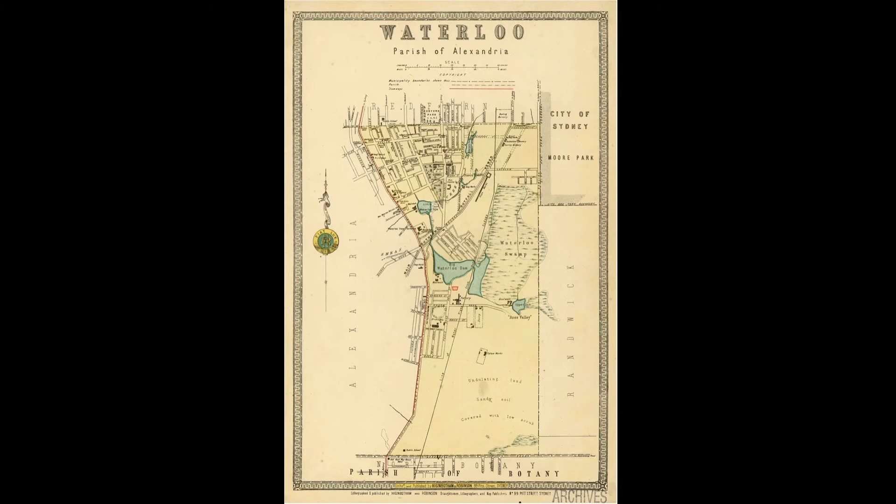This is a much bigger building - an apartment building in Green Square, under construction. As we all know, Green Square was never built on because it was a wetland. We were at the southern edge of Green Square town centre, and every building moving towards the station was taller than ours. We were on the edge of this heritage conservation precinct, and of course legislation requires a certain amount of sunlight to all apartments.

We thought, okay, let's build the entire block because that's what the developer will want. Let's then cut out a piece to achieve a challenge of getting sunlight to the ground floor apartments. Then let's give a courtyard to the south to provide a bit of relief for our neighbours and to allow light and air to this back section. And then let's carve out an entry sort of spine, if you like.

So that move that was based on sunlight then led to a large number of corner apartments within the plan. That then led to us looking at the corner apartment as a typology. It enabled us to split bedrooms, which we thought might work better for a mix of family types. And it enabled us to achieve wraparound balconies with flush floors to give a better sense of expanse of light in what are relatively tight apartments.

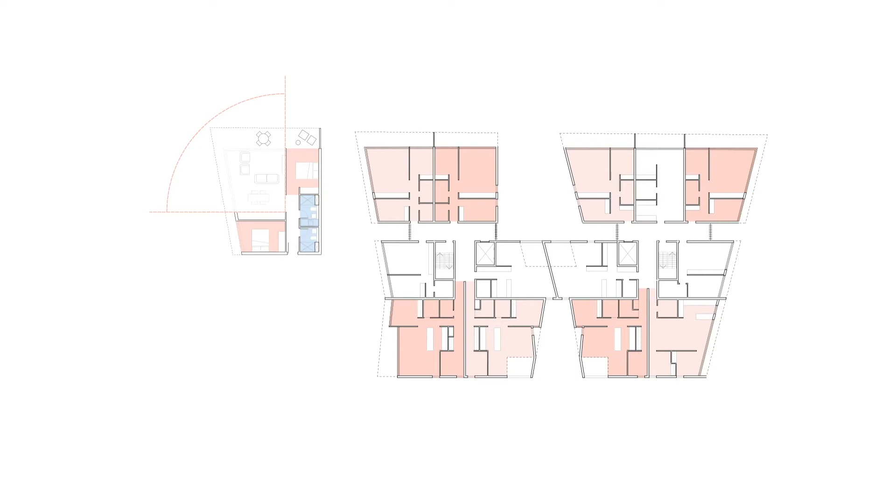It also created a major garden space. So again, here we're working with Sue Barnsley, and Sue's worked with us to create this garden space, which also gives to the street as much as it does to the inhabitants of this building.

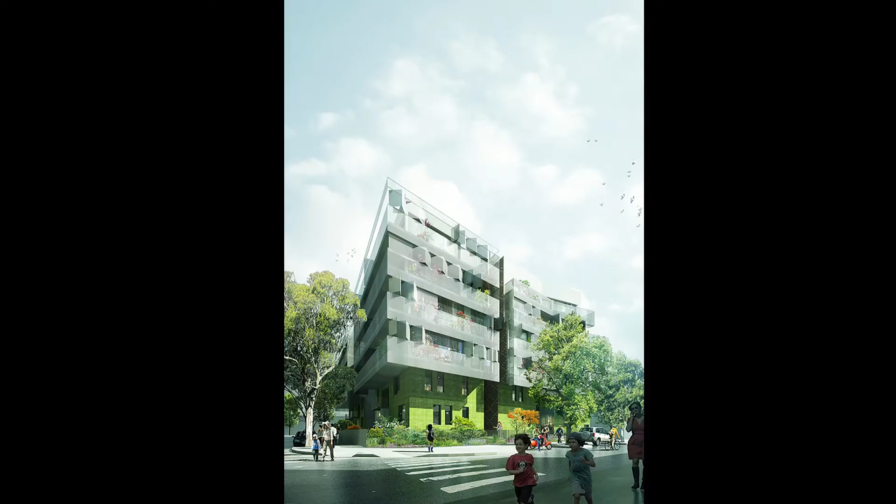And then the materials evolve out of that. So we've used green glazed bricks in the garden zone, and then a more sort of ephemeral materiality to the wraparound balconies on the upper level. We're trying to dissolve this building into the sky. I think everyone tries to do that the first time they work on something tall.

They didn't work out, they didn't allow for loading in the early plans. So our brief was to provide a new entry, a glazed entry on the north side of an institution which has 70 scientists basically researching climate change. We thought there was a bit of an issue with that. But the idea of it being glazed is the museum was trying to reposition itself as an open, 24/7 open living room, not a closed sort of dusty container of collections.

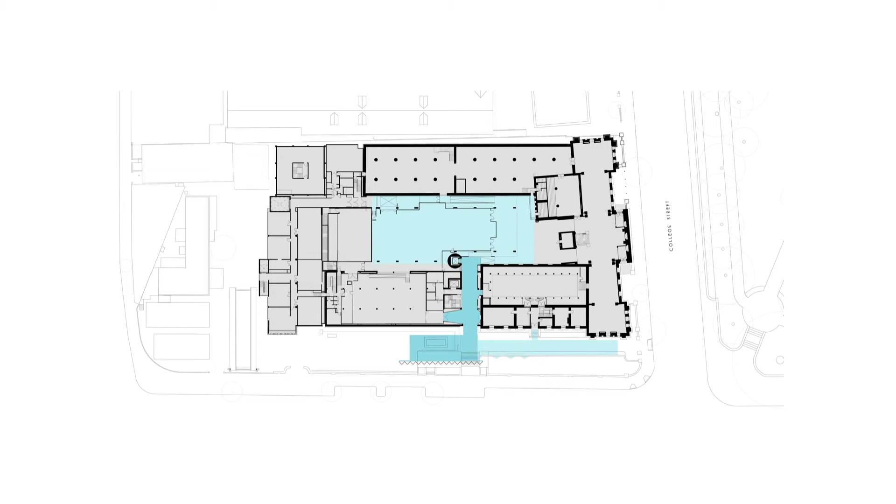So what this enabled the museum to do was achieve clear circulation to the centre and then circulate through these beautiful old kind of galleries. That was the sort of broad intent. So really the project was about negotiating the sun through glass.

This is the William Street elevation, with the addition of the Crystal Hall. So you see it has a sort of a planar quality like the Parkes Farmer wing, this beautiful wall of stone, and then a filigree sort of like the Barnett face to the Lewis, the original Lewis Museum, which sits behind it. And this is it here in its context, the stone against the glass against the stone.

It also provides a platform for engaging back with the city, and I think that was really important. So we sort of accepted that it was going to be a glass pavilion on the north face of the museum. We were trying to avoid it feeling like a piece of corporate air-conditioned glass box from the city, and feeling like it evolved more out of the museum itself.

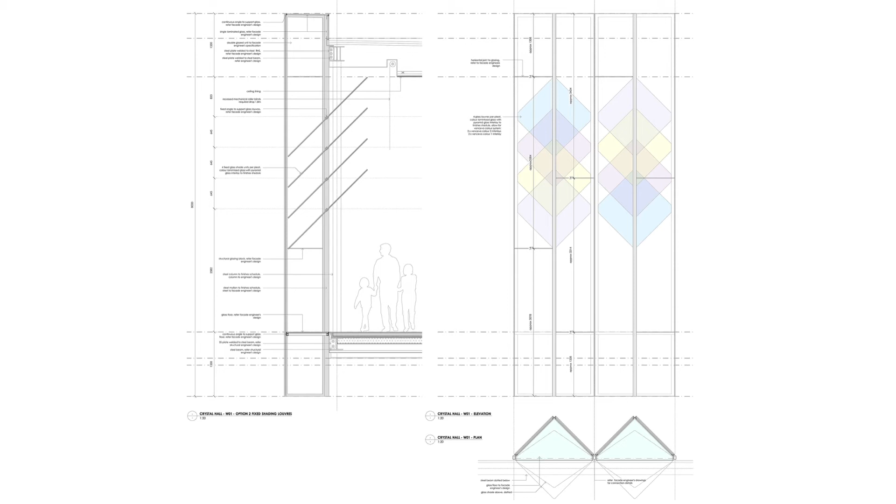So we looked at crystals and the way crystals refract light, and we evolved a high-tech glazing system with ventilation and these giant shading diamonds, if you like. They have a pyramidal surface on the upper side, so that actually does help reflect the glare from the sun. And then they have a coloured interleaf which picks up on the colours of refracted light, and a dot frit pattern to assist with shade. So it's working pretty hard.

It enables a transparency through the middle of the building. So this is high performance glass that's relatively transparent. If anyone knows their glasses, I'm sure there's a lot here that know a lot more about glass than I do, but it sometimes becomes solid. It's got a very beautiful ephemeral quality to it that extends past the enclosure of the building, so it feels more like a screen than a glass box.

And that speaks through its architecture to the architecture of the heritage buildings. And that provides this beautiful sort of shade. It almost feels like you're standing under the shade of a tree when you're in that space, and provides shade down to the public domain below.

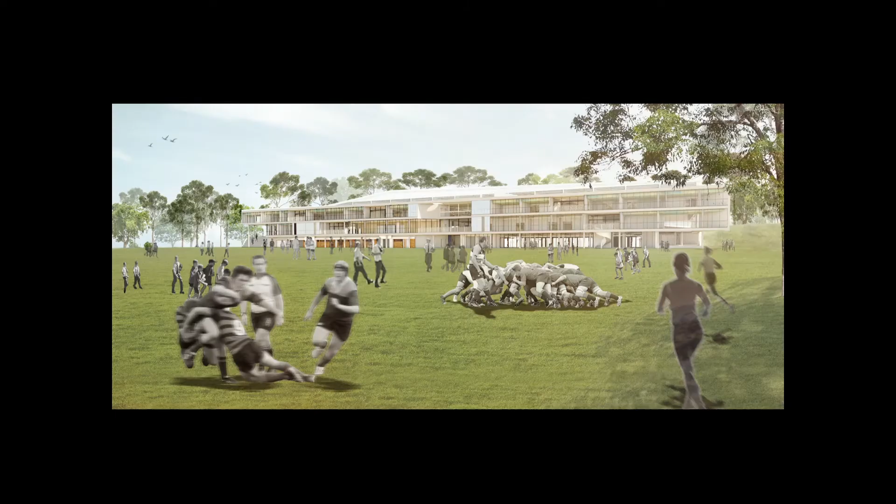So this is a site where we've dug a big hole, a very big hole. It's Barker College up in Hornsby, and these are sports fields. So they're big, it's a big site. And the project is a sports building on one of these sports fields.

And the school has a beautiful philosophy, which is every child, every experience, every day. So it's about embracing all. So we felt that this project needed to be a celebration of sport.

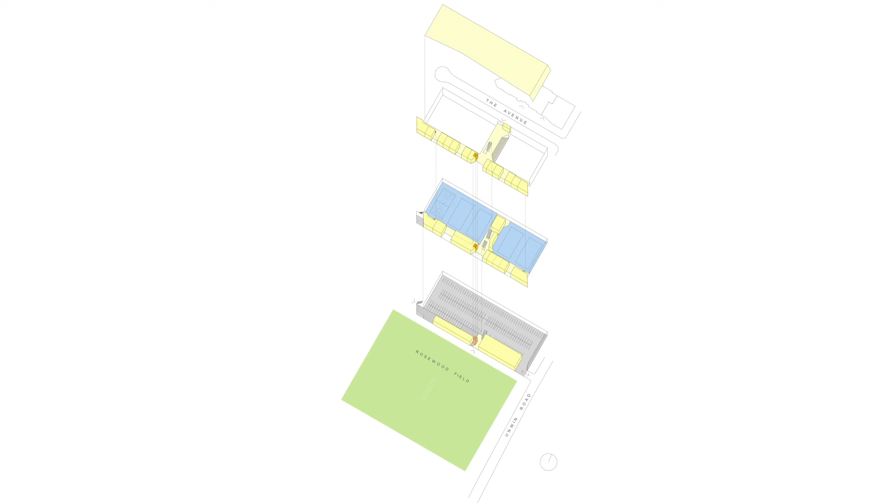The challenge of a sports building is structure, acoustics and light. So here's the field. There's an existing building we're retaining. We're wrapping car parking underneath. We're adding a series of classrooms and fitness rooms and the like along the field side, which is on the south side. These are the courts, 2 indoor basketball courts, netball courts, upper level with a bridge connection back to the street, and then a parasol roof, let's call it.

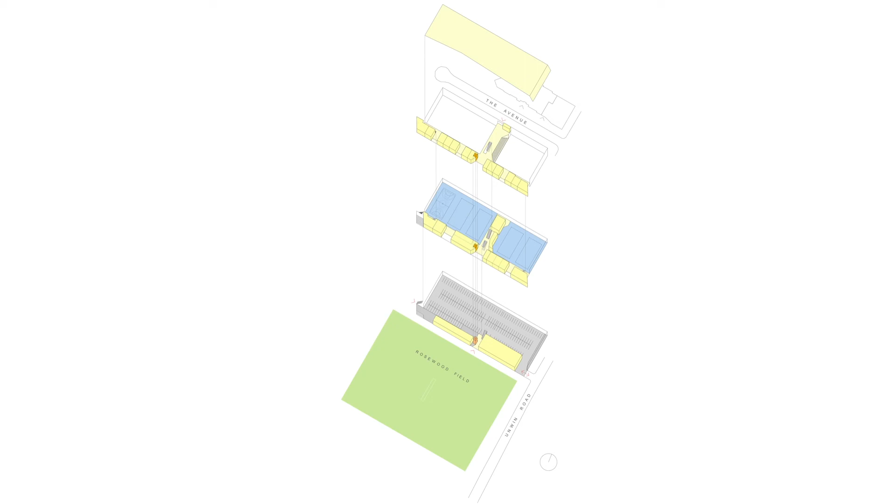So in 3D, essentially it's a linear sort of field building, if you like, and then the sports hall in between. And this linear building can then get light and air on both sides, and this concrete structure and this excavation provide essential structure for this sports hall, which is trying very hard not to be a shed.

So we use sunlight in this project to help mediate the scale of the project. We use diffuse light down onto the sports playing surface because it's so deep that if you don't have roof light, you'll need artificial light in here. And we use diffuse light through this canopy to create a protective public zone and also to add extra shade from the north down into the sports courts.

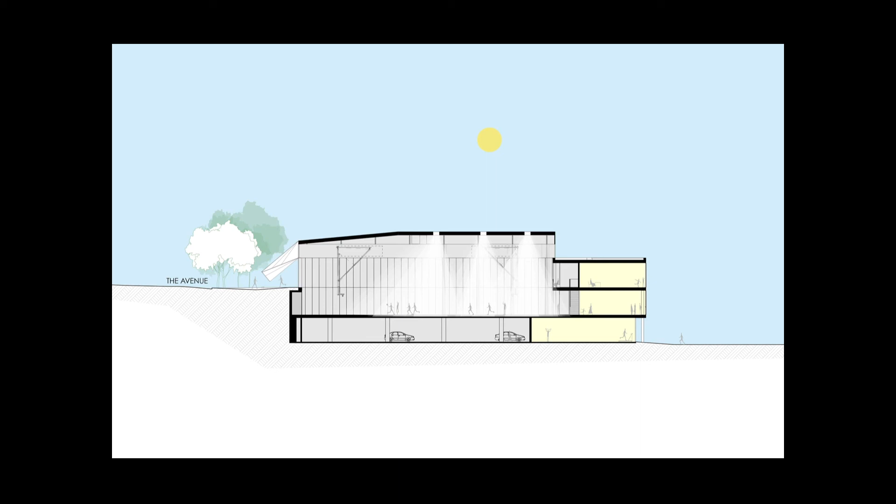And then we use direct sunlight above the main stair so that parents arriving on a Saturday from their cars know where to go, all the way up to the top to the coffee. And direct sunlight on all the balconies and breakout spaces to draw people into those sort of more communal spaces.

So this is that sort of upper entry area. Here's that staircase which goes straight down, show court on one side, classrooms with their breakouts, and these are very important to achieve the kind of cross-ventilation we need to achieve in this building. And the canopy wraps around these sides.

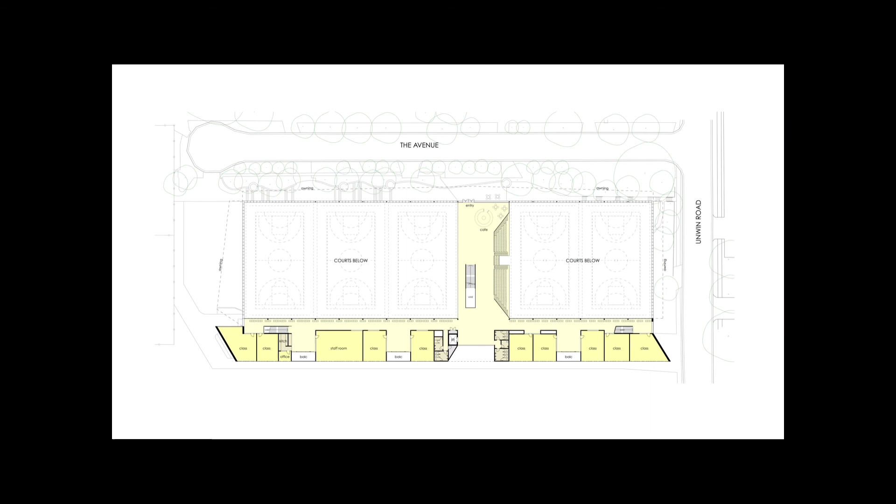We like working with fabric. It's a fabric canopy. It moves in and out. It tries to pick up the sense of the topography. It provides a sheltered space to walk along, and it broadens out at the entry. So it tries very hard to negotiate scale.

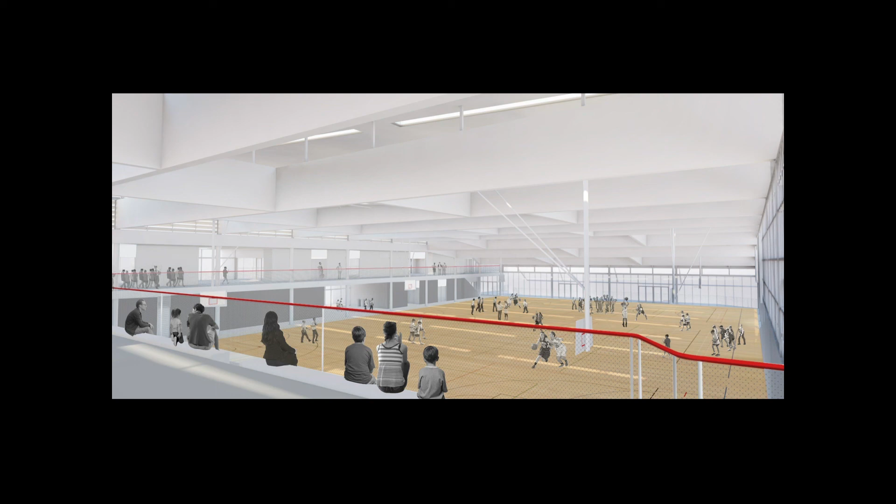And then this is almost like a blown up version of the ceiling of that house I showed you, where we're creating a crate, which is actually a crate of structure. So it's 2 metres deep. It allows these basketball hoops to fold up into that zone. It's all acoustic, and then it also helps to reflect light as light comes through the roof, diffuse down onto the courts.

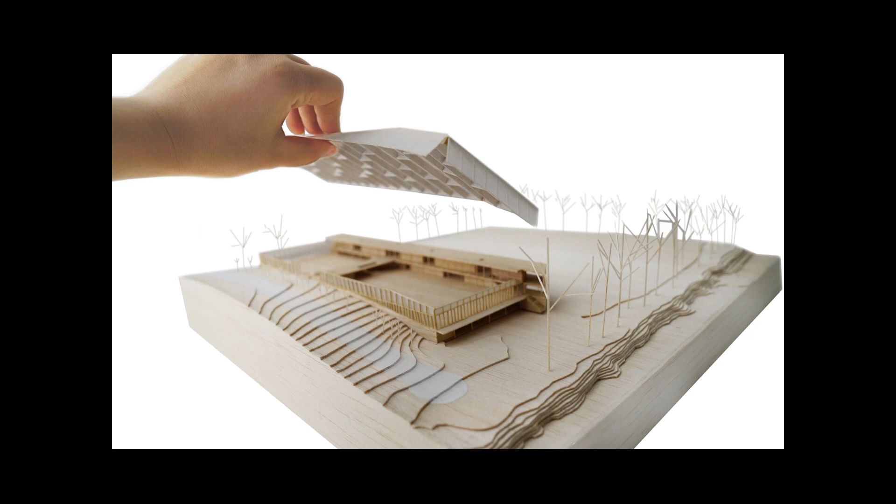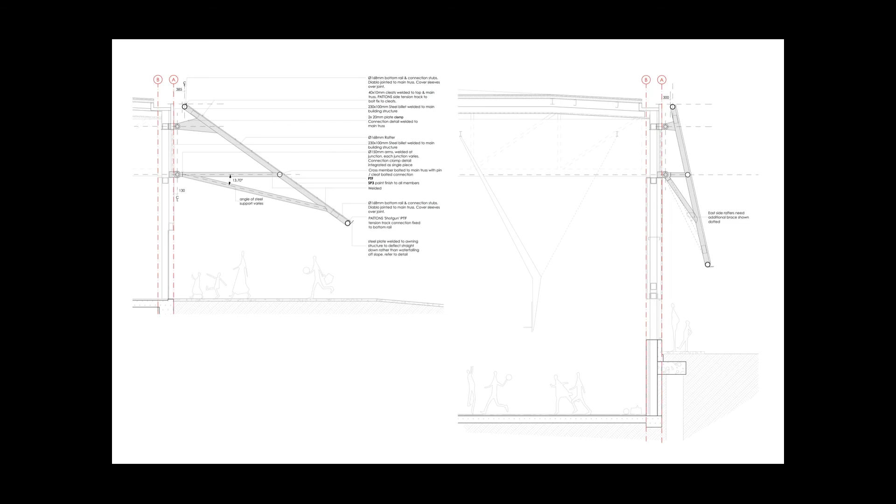So do architectural ideas translate across scales? We believe they do, and we are interested in this inflection. It is usual to consider the personal in a house, but maybe not so to bring that thinking into the space of a community building or sports building. It is usual to look at the urban context for a museum entry, but maybe not so usual to think about the geological context of a house. We deliberately cross those threads of thinking.

That way we are able to posit a house in the city and a child in a sports hall. Thank you.